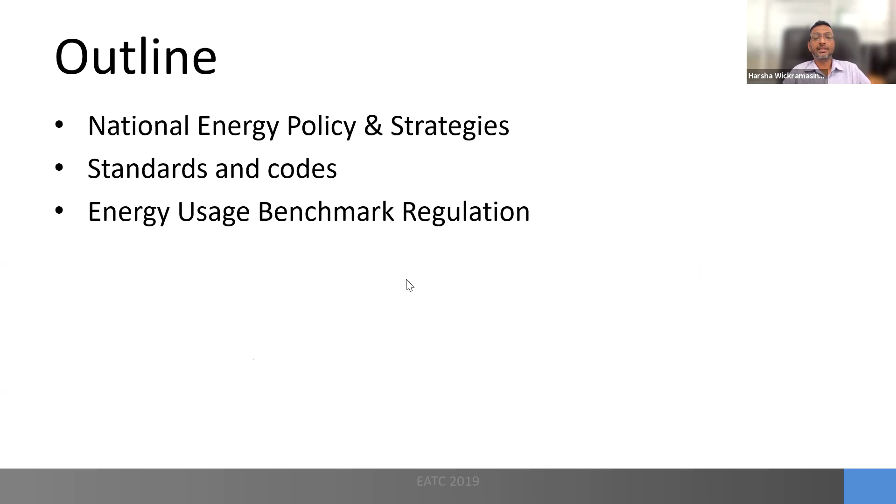So now back to the presentation. My presentation outline says national energy policy and strategies, and then the standards and codes, and the energy usage benchmark regulations. Let me take you to the learning outcomes. After following my presentation, you will get an introduction to the national energy policy and strategies of the country, especially with the view of, there are several elements in this national policy, but on the energy efficiency side, special emphasis.

Then an introduction to the different codes and standards used in ranking of buildings. Not very much relevant to the plantation community, I must say, but you might be interested in understanding these things. And ramifications of the energy usage benchmark regulation on energy reporting, auditing, and improvement of energy performance of the facilities you manage. So that is the most important part of my lecture today.

So before starting the presentation proper, why worry about anything? We can very happily do without worrying about anything, but we worry about many things. As you are well aware, we worry about our children, we worry about our country, and there are so many. And as managers, we have to worry about our businesses, the production facilities we manage. So why worry about things is a pertinent thing.

So we will just focus on energy. Why are we worried about energy? So firstly, if something is to be improved, we have to control it. So this is a very important slide I am presenting to you. If something is to be improved, we have to control it. Otherwise, we have no control over it.

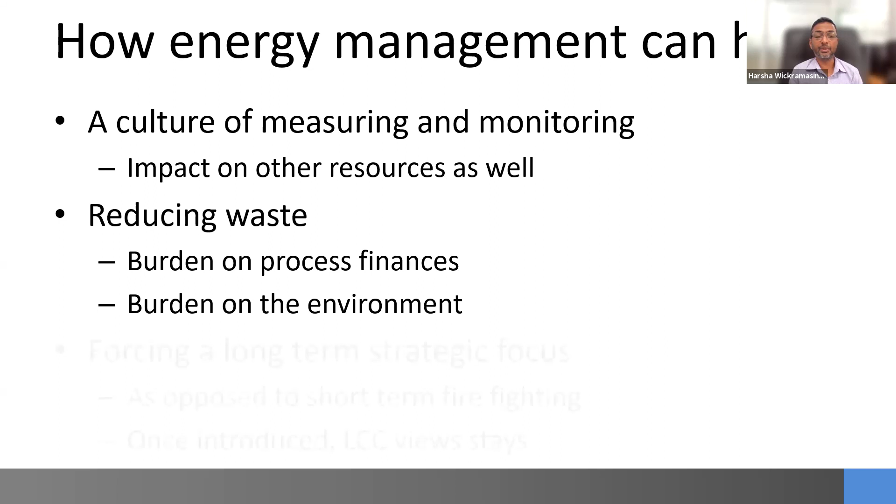And forcing a long-term strategic focus on your system rather than short-term firefighting is the way to go. Otherwise, people always resist that kind of abrupt change in your practices. So once introduced, the life cycle, LCC stands for life cycle cost.

So if you successfully implement energy management practices in the factory, definitely the life cycle cost thinking will come into your staff, and they will think twice before purchasing anything which will have greater significance in the time during the operations rather than during the purchase. So that's an added benefit of these things. So that being said, let us move on with the national energy policy.

Any problem or any question up to this point? I can conduct this in a very interactive manner. If you have anything, just unmute and speak. You can speak up. Okay, in the absence of any questions, we will move on.

So, contrary to popular belief, we have a policy for the national energy affairs. Unlike many other sectors, I'm quite sure the agricultural policy of this country is in the draft form for the last 20 years, if I'm not mistaken. It never materialized as a published national policy. Correct me if I'm wrong, but I just don't know whether we have a national policy on the plantations. I am quite sure we don't have a national health policy, or many other policies are missing in our country. That is why our country is in this sorry situation.

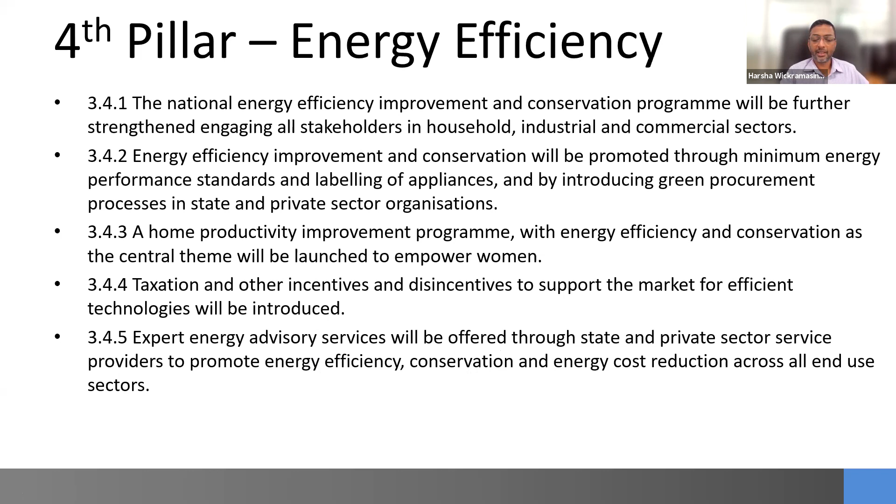We can get someone who will do that for a fee. We recommend you conduct an energy audit in your facilities at least every two years, because things tend to deteriorate when we move on. So these are the things, and there are some more.

Water resources will be recognized as a valuable indigenous energy resource, for power generation and agricultural water, so it will be treated as a valuable energy commodity. Conversion efficiency of power generation facilities is again not relevant to our discussion, but this applies to the CEB and private sector generators.

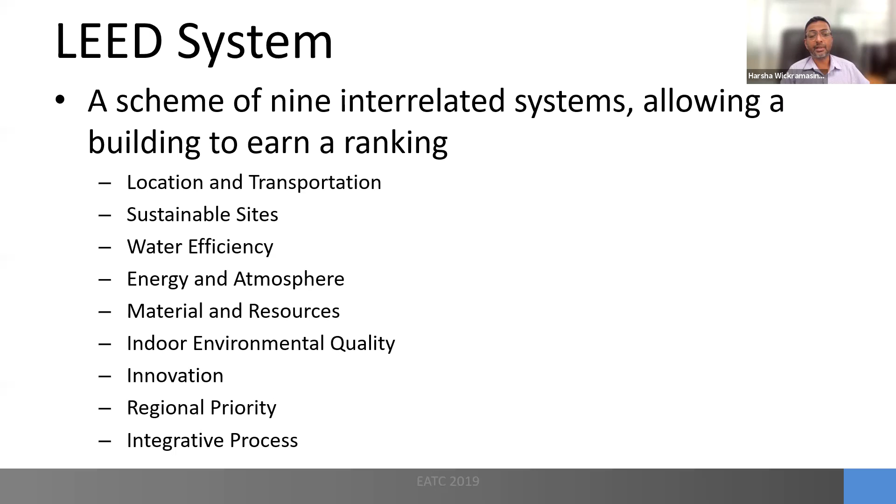There is a point scheme up to 99, if I'm not mistaken. Based on the point scheme, you get either a certified rating, silver, gold, or platinum - there are 4 levels. So if your building is really designed as a green facility, you might earn platinum status.

I know there is at least one apparel manufacturer in the country who has reached platinum status in one of their facilities in Seeduwa. There are also a large number of silver and gold rated buildings in the country. So this is a good system to keep the energy burden and the environmental burden low in your buildings.

There are many abbreviations used in this industry.

LEED stands for Leadership in Energy and Environmental Design, or something like that. There's LEED AP, LEED EB, NC, CS, CI, and so on. There are so many abbreviations associated with this LEED certification system.

But there are serious criticisms of this system by other quarters, saying that it allows people to score very easy points and become a green facility even without doing anything actually green about that building. Despite that criticism, people still use it because it's a very well structured and easy to achieve system.

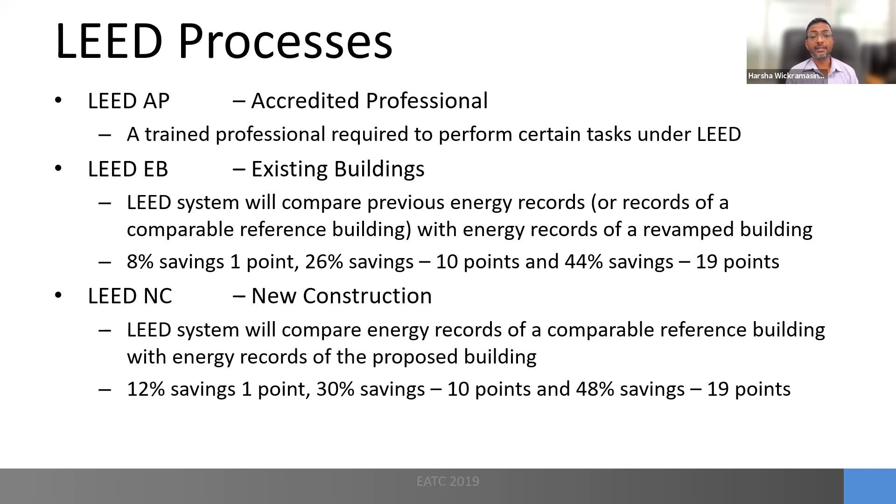CS and CI apply to common facilities like the World Trade Center building, where the core and shell is the outer envelope, and the air conditioning and large facilities of the building are operated by the building owner himself. CS refers to core and shell, that part of the building.

But if you have an office in the World Trade Center, that applies to the second part, LEED CI, or commercial interiors, where the changing of light bulbs, office equipment, and all that falls under the control of the tenant. So the core and shell is the landlord's responsibility, while commercial interiors is the tenant's responsibility.

So that's what's being said about the LEED certification system. I'm almost running out of time. So Green Mark is from BCA, the Building and Construction Authority of Singapore.

They introduced this in 2005. It's a code we rely on very much because it is substantially similar to Sri Lanka's environmental conditions. So we can bank on the BCA Green Mark system, which is based on 16 criteria, 52 indicators, and a 140-point system.

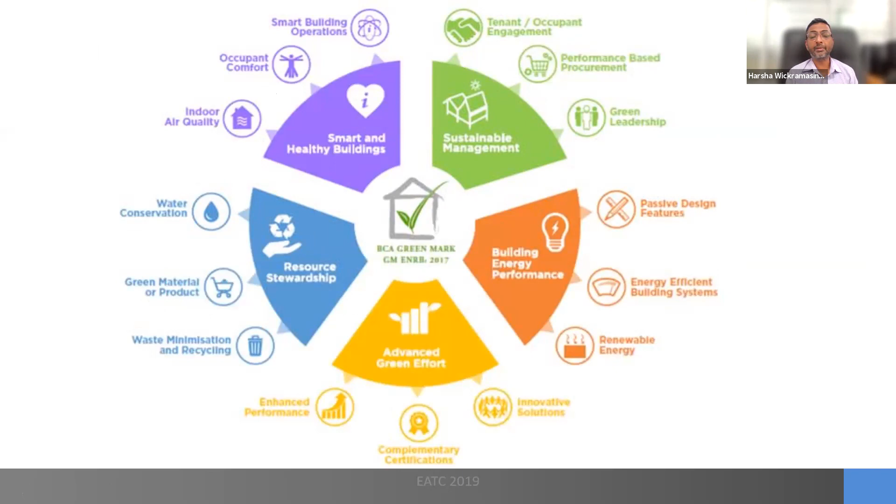And the beauty of the Singaporean system is that they make it more stringent by the year. Every year there is a revision, so it becomes more and more stringent. So people will have to take a lot of measures to make their building stock energy efficient.

Then we have ASHRAE 90.1, from the American Society of Heating, Refrigerating and Air-Conditioning Engineers in the United States. It has a separate volume called 90.1. It's not very relevant to you, as it's for commercial, air conditioned buildings, so I will just explain it briefly.

This is a very technically sound and well-implemented code compared to the LEED system and the Green Mark of Singapore. It is very sturdy, useful, and result-driven. So we tend to base our building code very much on ASHRAE 90.1 as a result.

It covers the building envelope, the outer shell of the building, the air conditioning and ventilation system, the lighting system, service water heating, and other equipment in the building. These things are covered in 90.1, and our building code is also structured very much along these lines. I'll skip some of this since it's somewhat similar to the green building system.

So the intended design and the comparable building are compared, and the design energy cost must always be lower than the energy cost budget of the particular building. So they are driven to pluck the low hanging fruits first, I mean the easier things first, and progress to the difficult things. That is how these things are done in the case of the ASHRAE building code.

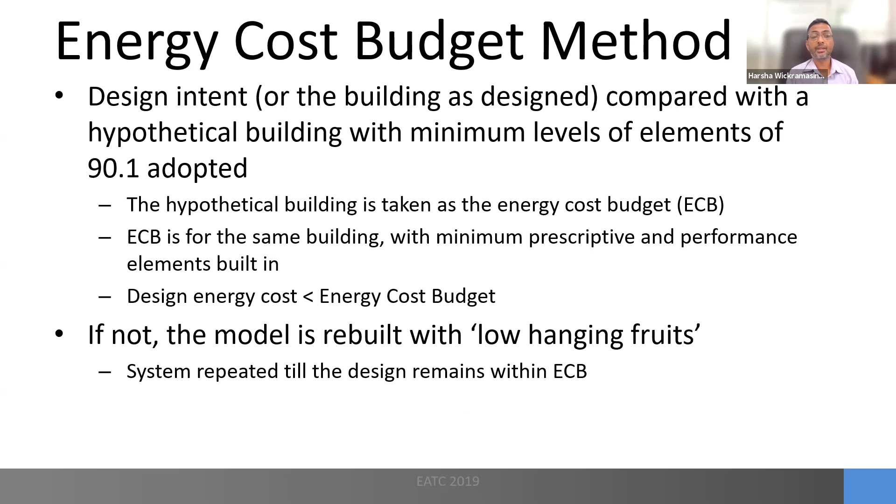They have introduced a building energy system on a voluntary basis since 1991, but very unfortunately, it's a difficult code to follow. As a result, people are following the private sector initiative more than the government sector initiative in America. But it's nevertheless a good code.

Then this is important for the industry and the rubber industry, because ISO 14001 and 9001, most of you are very much aware how these systems work. And we are glad to say there is already a system for energy management, ISO 50001. It was launched in 2011 and underwent a major revision in 2018.

So there are no benchmarks, but just like the quality management system, it's built on your own processes and own targets. So it's a continuous improvement system based on the PDCA cycle. I'm sure you understand the PDCA cycle, the Japanese way of management. So development of policies, setting targets and objectives, making data-backed decisions, measuring results, reviewing effectiveness and continuation of the improvement cycle. So this is how the ISO 50001 system works.

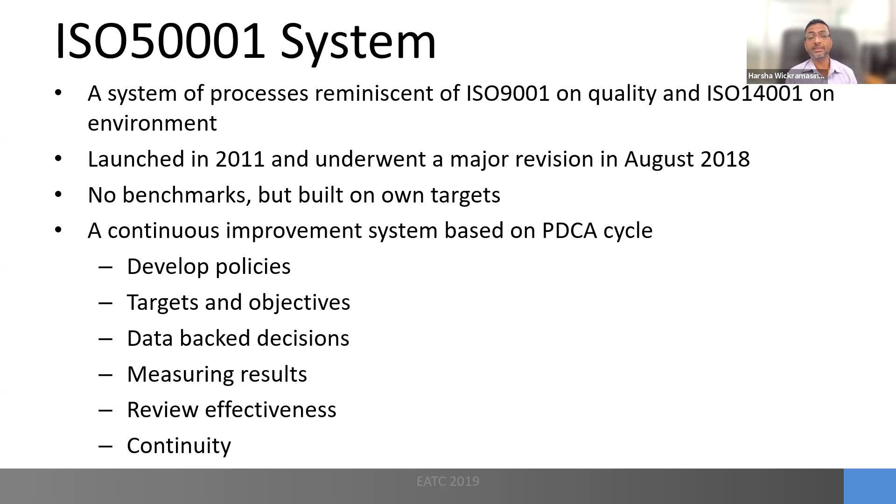And fortunately, our Sri Lanka Standards Institution is an accredited body who will help you in implementing ISO 50001. If you are really keen, contact us. We can get you help to do these things in your factory. And it's based on a family of documents in this fashion: energy audits, energy management systems, guidance, like that. So if you are conversant with 9001 and 14001, this is the ideal solution, a complete solution for you to consider. Any questions up to this point?

Okay. In the absence of any questions, we will move on. The difficult part, but I have very limited time, so let me try to conclude it as fast as I can. The energy benchmark regulation is not readily applicable to your organization yet, but the second batch of agencies will definitely cover the plantations. So be careful, try to fully understand what this is about.

So some of you may be very much aware of the legal system of our country, but for the people who are not, let me take you through quickly. At the apex level, we have the constitution of our country, then the acts of parliament. The Sri Lanka Sustainable Energy Authority Act number 35 of 2007 is one such act. And the act establishing the National Institute of Plantation Management in 1979 is also at the same level.

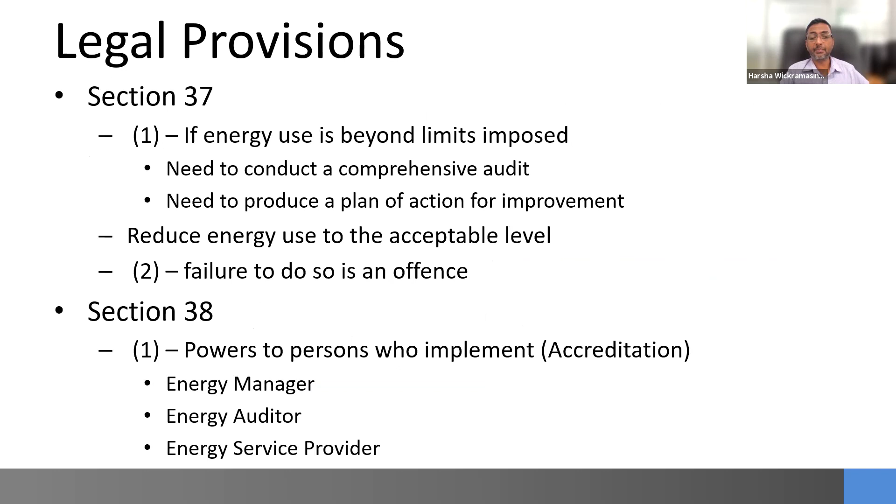So let me quickly show you the provisions. Sections 35 and 36 are the ones we used to develop the new regulation. And with 37 and 38, the people who are engaged in this activity can be empowered with the simple regulation. That is what we have done. And also covering 39 and 42 about energy information: what kind of information we can expect from an end user facility, and what will happen to the end user if they contravene this law. These are things which we have framed effectively.

So to cover all the legal powers, we have used the Sustainable Energy Authority Act number 35 of 2007 as the foundation. Then the benchmark regulation, which I intend to explain here, as the main framework, and schedules 1, 2, and 3 to demarcate who shall comply, accreditation for who is empowered to do certain things, and rules on forced implementation. All these things in combination have given us this system, and the whole system is based on the ISIC information management system.

ISIC stands for International Standard Industrial Classification. There is a 4-digit system where all the manufacturing operations, service operations, and business operations of any economy can be classified. So we have used this numbering system from the United Nations to classify industries. And when all these things happen together, we'll have a mandatory energy efficiency improvement and conservation program for the country.

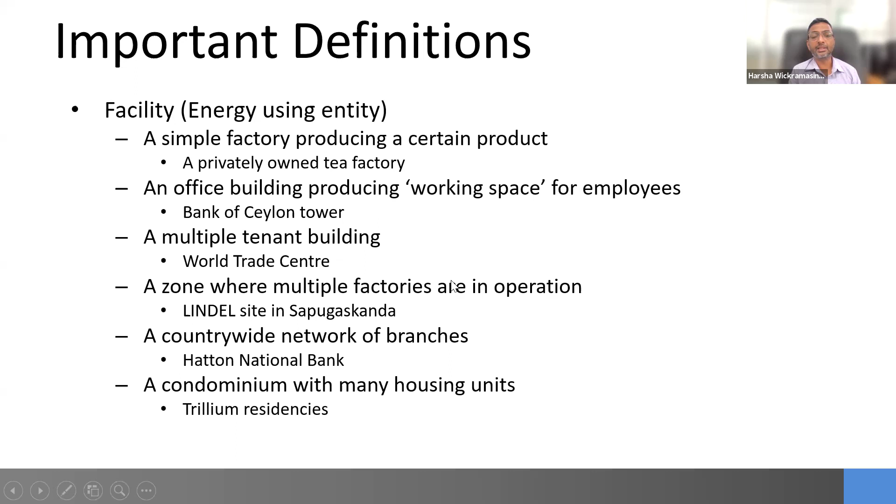And also condominiums. Individual homes like yours and mine, the planters' bungalows will never come into this picture, but places like Trillium Residencies where a large number of housing units are grouped together in a condominium, they will come under this regulation very soon. So we have structured it like that.

So you don't have to worry too much whether you are going to jail or you are going to pay the fine. If it's a factory producing a certain product, it will be the board of directors owning that facility. But if you are the sole proprietor, definitely it's you.

So you have to be careful because the litigation and the consequences, everything rests on the board of directors, not the factory officer, not the mechanic, not the superintendent, not the Sinnadure, but the board of directors of that regional plantation company will be at fault. So we will be suing them. So the effect will be very severe on the culprit plantation managers. So beware.

So there are certain things I have to explain here. So there is a particular person known as the facility manager, in which case it becomes the superintendent of your organization. In the case of the energy manager, it will most likely be the group engineer taking care of your energy expenditure of the tea factories coming under your purview.

If it's a single factory, then probably you have to have at least an external energy manager to take care of your facility, like the fourth bullet here, a hired person or a firm for smaller facilities where no internal capacity is available. So if it's a very large facility and if the group engineering manager is fully occupied, then they can hire a firm to take care of the energy aspect of the facility. So this person or the entity will be responsible for energy data recording, reporting, and coordination with the authority. So you have to have an energy manager for your facility.

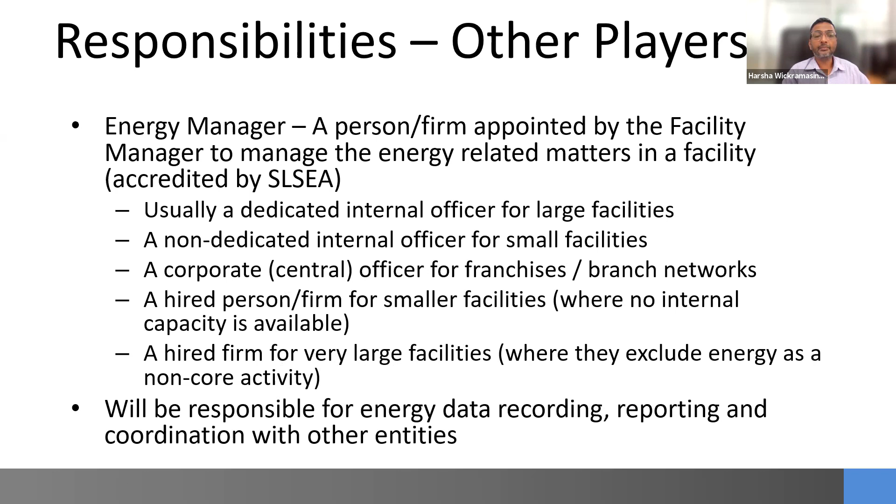Then there will be an energy auditor and an energy service provider. If your facility is found to be performing lower than the energy benchmark, you will be required to conduct an energy audit immediately, and the energy auditor will have to give you a list of improvements possible for you to qualify. If it is energy efficiency improvement, the company will be known as the energy service company. If it is a company integrating solar into your rooftop, something like that, then it will be known as a RESCO, Renewable Energy Service Company. So you will have to get the services of such a company. There are about 30 accredited energy auditors in our country. You can get the services of any one of them.

So for the implementation of this regulation, our authority, Sustainable Energy Authority, will identify a category or several categories of facilities and schedule those. So we can categorize office buildings used only during daytime, and we can also have several categories, all commercial buildings like that. Once a facility or a range of facilities are scheduled, then compliance is expected from these people. So there will be the first report, the reported energy use. It will be the commissioning report of the new building or derived from existing facilities, actual energy use for a particular period of time. We have taken the period to be 1 year. So starting from 2021, there will be the first data collection cycle where we will get the reported energy use from all the scheduled facilities at the tail end of year 2022. That is next year.

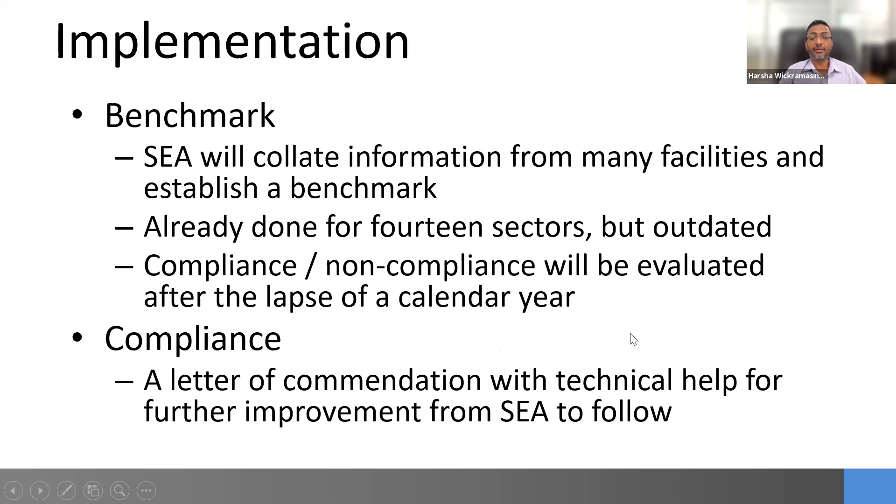Thereafter, for non-compliance, they will be required to perform an energy audit and provide a new report known as the prevalent energy use report. It will also have the plan of action for improvement and implementation program, which year you are going to implement the roof fan modification, which year you are going to improve the tea rollers, like that. There will be an energy efficiency improvement and conservation plan developed by you with the help of the accredited energy auditor. And after implementing this plan, you will most likely enter the whitelist or the compliance stream.

So if you are still unable to comply with this requirement, non-submission of information, that is one offense. Failure to conduct the energy audit when requested, and failure to reduce energy use to the benchmark level. All these things will be taken as offenses, and there will be severe consequences. So just remember that. And there are 3 schedules.

I will not take much of your time. These regulations are one thing. Schedules attached to them are a different thing, because these are easier to change rather than changing the regulation. So for the moment, we have scheduled buildings which are more than 5,000 square meters in size, and of a particular economic category. I will show you how.

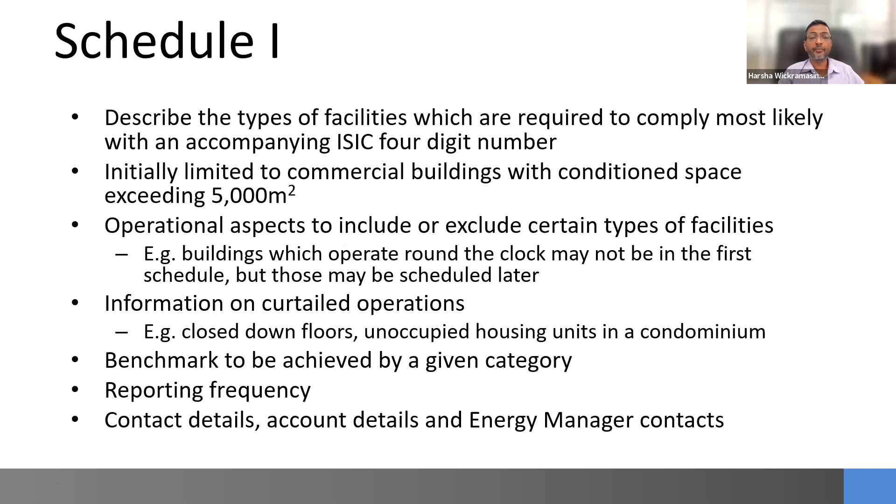Then the Schedule 2 is the data submission formats, what to be filled. It is available in our website, so all the building owners can submit this energy data. And the Schedule 3 is a simple rating table, which will guide you to see what kind of star performance you have achieved, or whether you have entered the non-compliance rating level, whether you are below the benchmark or above. If above, how better you have performed against the others, it will be given in the Schedule 3.

So with these schedules and the regulation, we are going to regulate. The good news is that coconut and rubber, they are not in the first item. For the first item, we have selected retail sale in non-specialized stores with food, beverage, and tobacco predominating, meaning places like Cargills, Keells, Arpico, the supermarket store we call. These are regulated in the first regulation, which will be effective from early next year. And the next item we have selected is the other retail sale of non-specialized stores. So there are 2 categories, but predominantly places like Keells and Cargills.

Then we have selected the second class, that is the banking or the financial services industry, covering from the central banking industry, the central bank of our country, there's only one. Then other monetary intermediation, all the banks, leasing companies, except insurance companies and pension funds. So all the insurance companies and the EPF, ETF, those places are spared, but every other player in the financing community, they are taken care of under these things.

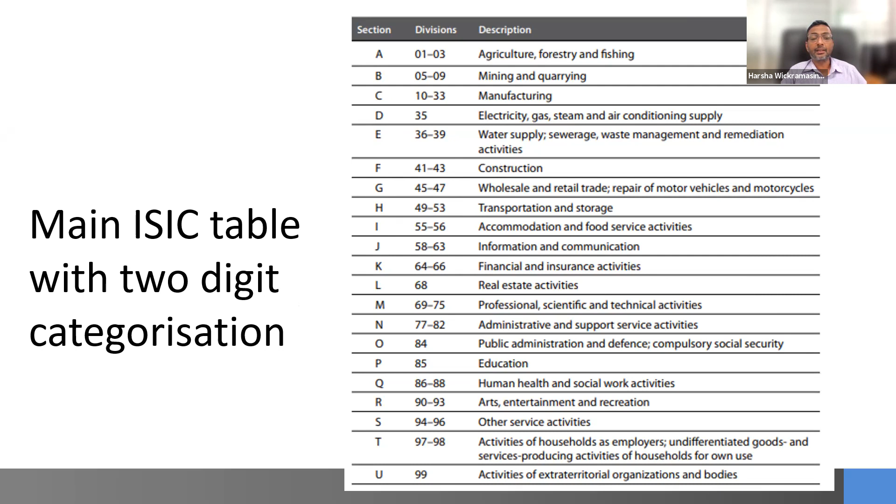So there you can identify your category here. I think the industry falls under food and beverages. I just don't remember the item. There's some number here. So your category and your 4-digit number can be selected from that one, and it will be regulated. So this is the way things are. The food industry division 10. So your thing is coming under most probably 10 and some other number. We will see that later.

So the compliance, the commercial energy inputs can be easily accounted for. So electricity, diesel, fuel oil, all that can be taken in. But if you are using your own fuel wood and own biogas generation at site and own solar generation from your rooftop, then there can be issues in data inputs. But the amount of output, it's very easy in the case of plantation processing, because kilogram of black tea is going to be your primary output, or desiccated coconut or the rubber kilograms.

So it is very much easier for plantation community, but it's a nightmare for the banking community or the supermarket community to think about their output, what will be the output. So we are thinking hard these days how to capture it. And capturing all variables in the energy demand equation is essential. And data submissions must be able to complete their report generation as given in Schedule 2.

So the offenses I mentioned to you, the failure to submit the energy use report, and failure to conduct the energy audit, and failure to reduce the specific energy use to below the benchmark. So all these things are offenses, and the consequences, we have the fine stated, that is 100,000 rupees and 2 years imprisonment or both. So after conviction, if you are still operating your factory in an energy wasteful manner, you will be fined 100,000 per day. So this is the punitive element.

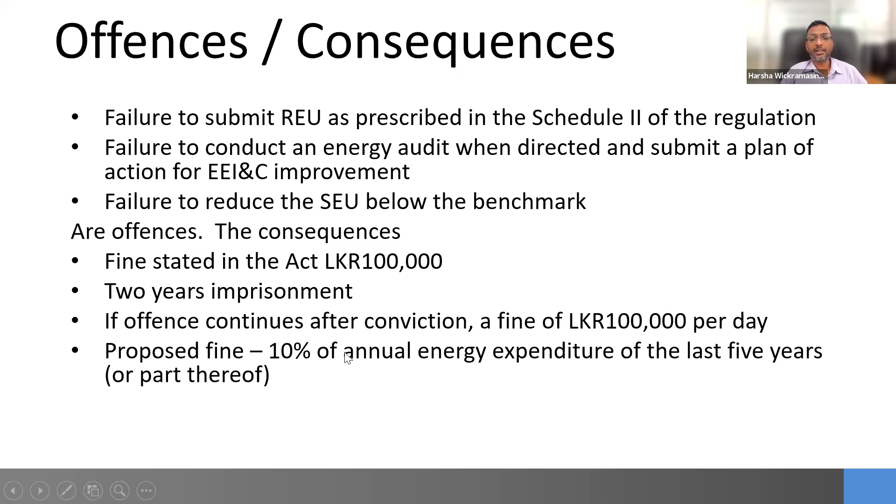So paying 100,000 rupees every day from a factory is not going to work. So the end result is you have to improve your facility or face all these unnecessary trouble. But we have proposed a 10% annual energy expenditure in place of this imprisonment and 100,000 a day fine. So this is somewhat summarizable. So we will see whether we get approval from the legal authorities whether this is possible. And it will change the reporting culture of many places. But fortunately, the plantation community, as I have explained, they are very much better in reporting and record keeping.

So the voluntary reporting is what is happening now. Energy managers are appointed. They are mostly the group engineer himself, and the duty is often neglected because he has so much other work. These things are not done. Energy managers leave facilities and migrate to greener pastures, leading to collapse of the system. And reporting frequencies also vary.

But in the new system we are proposing, the reporting will be mandatory. You will be fined for not reporting. It's a firmed up duty; an internal dedicated person or an external energy manager will have to be appointed and made responsible. And you cannot neglect it like you do now, so there will be a very serious consequence. The energy manager function shall continue even after the person resigns, so there will have to be assurance of the continuity of this system.

The reporting cycle is fixed, quarterly reporting, and this will be enabled by an ICT platform. You don't have to fill in a lot of forms. It is purely logging onto an internet portal and providing this data. So this is my penultimate slide, I suppose.

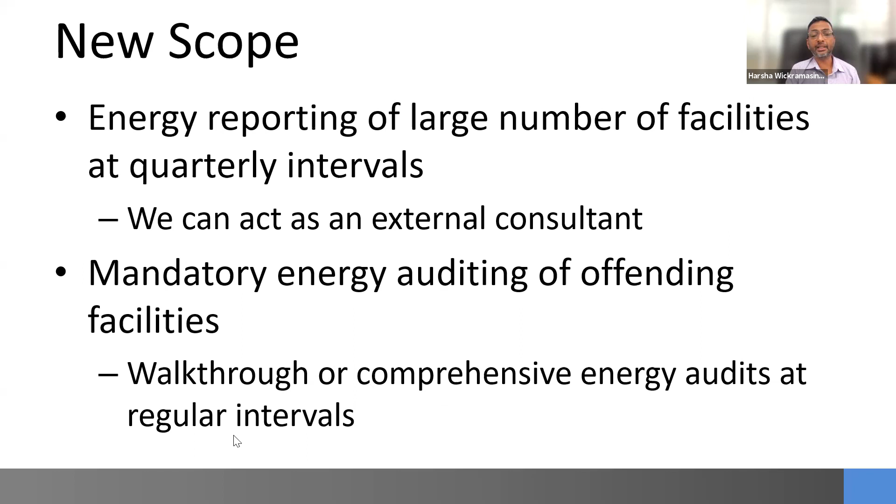I don't know about time management, since I have time to answer any questions. Over to Mr. Vidra Bandara. We can have a brief discussion or a question and answer session if that is possible. Any questions? Looks like not, Engineer Harsha Wickramasinghe.

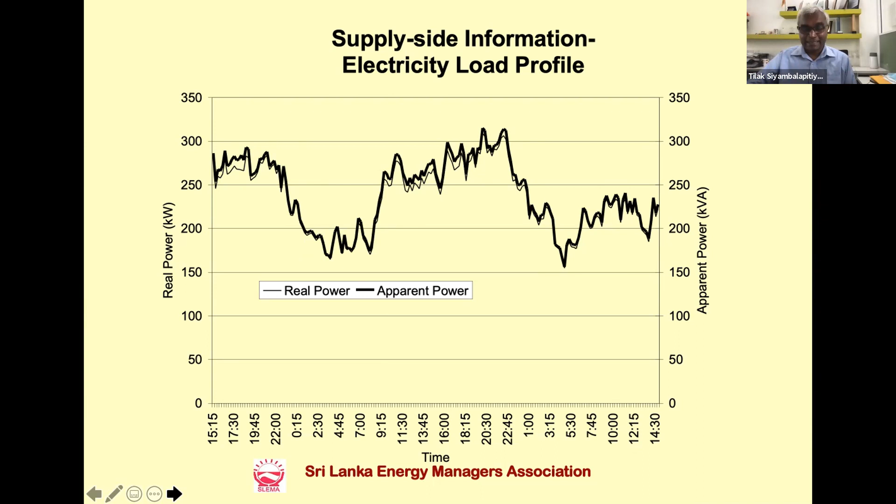I will later show you a tea factory load profile, but this one is for a commercial building. Different buildings have different profiles. This is just to tell you that profiles are different across different sectors.

So what is the main system and what are the subsystems, and what is the heaviest electricity consumer in your factory? I will skip this for the moment.

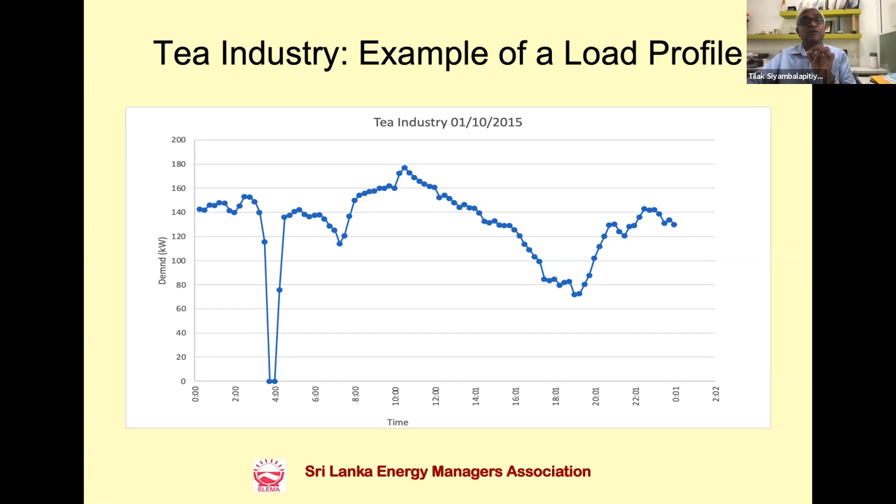So if we use more electricity in the peak time, as you know very well, you can look at the electricity bill. Electricity will be more than 20 rupees a kilowatt hour. Daytime electricity is about 11 rupees for most of you. And off-peak time, for most of you, it is about 6 rupees.

So whether the electricity tariff carries a subsidy or not is relevant, but it's a different issue. And for your information, I can tell you that industrial electricity prices are subsidized by the government. But then even within the subsidy, there is a time of use pricing.

So therefore, unless you know what is happening, you cannot save. As the saying goes, if you don't measure, you don't know. If you do not know, you cannot save. It could be a financial saving. It could be an energy saving.

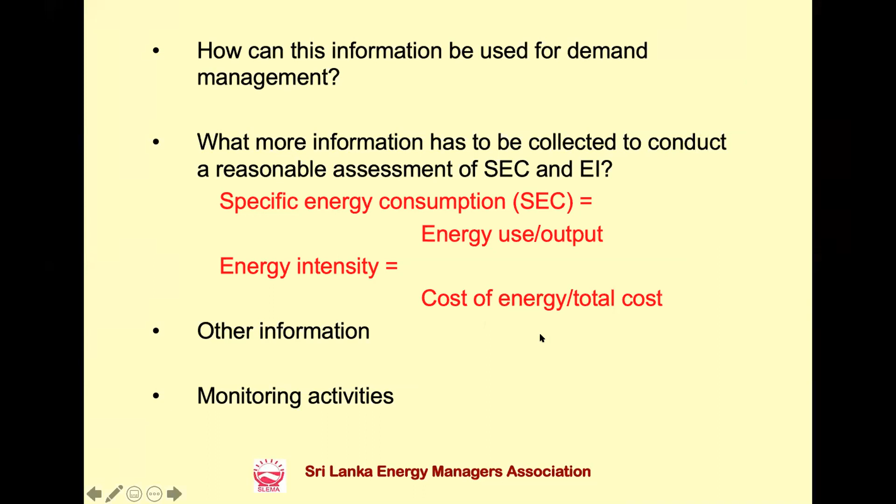Of course, the cost of energy goes up and down if it is biomass. Cost of electricity, of course, I have to admit usually only goes up, not down, because electricity is largely determined by imported capital equipment or fuels. So if at all, electricity prices generally go up; occasionally when various incentives are introduced, electricity prices go down.

So monitoring this is again relevant because then you know what weightage you should give to managing your energy. We generally tell the industry that if your cost of energy is more than 10% of your total cost, total recurrent cost—so don't include any depreciation, but total recurrent cost—that means energy cost, manpower cost, maintenance costs, and any interest payments.

So these are the recurrent costs in an industry, not the capital cost, not the depreciation. So energy cost, if it is more than 10% of the total operating cost, we say it is an energy intensive process. So for your tea factory, your rubber factory, or other plantation manufacturing facility, coconut industry, or industries to which you advise, please examine what the energy intensity is.

There is much other information that you can collect and keep, but these are the basic information at a macro level of your facility. We will come to more details; I will introduce you to some more details. Now, what do we do with this information?

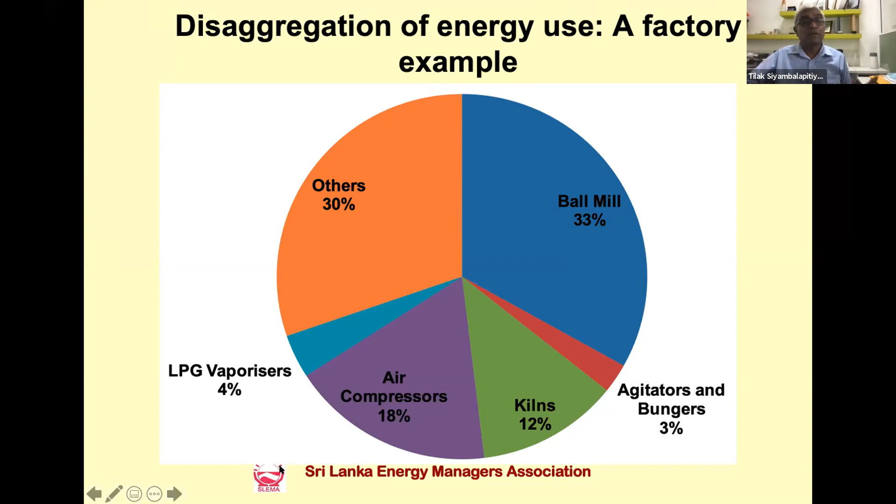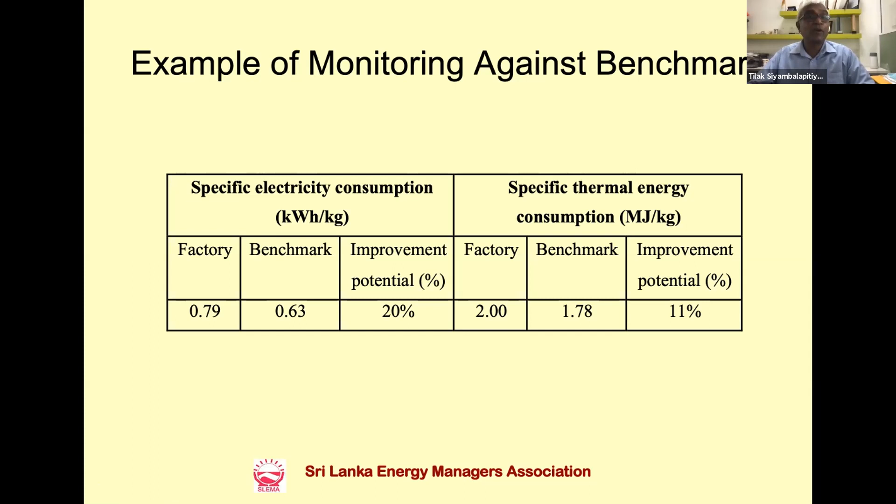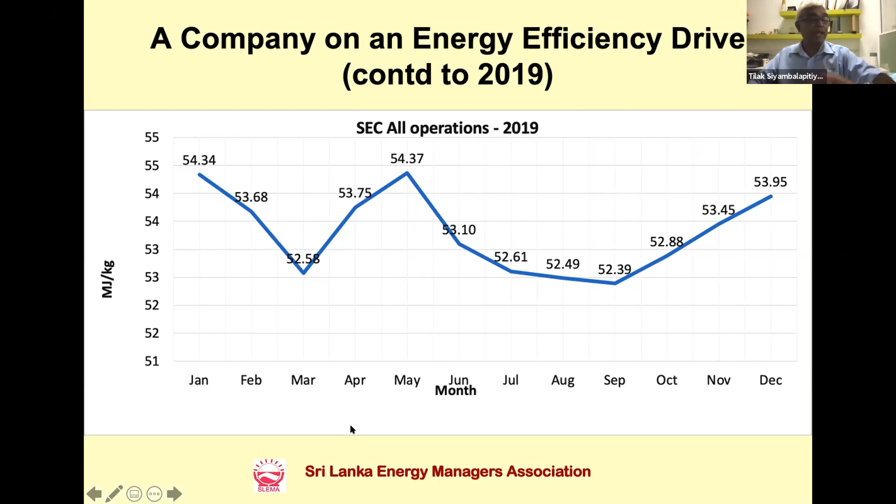And then before I close, because I have been asked to economize on my time, I will show you some recent studies we did in the tea industry, as follows. The tea industry for the last 20 years has been requested to manage the airflow to the withering process. All of you know that. So I, being one of the people who were associated with the initial studies, recently we thought that we should do a baseline study as to how the industry is performing with regard to airflow management to the withering process.

So I don't need to explain to you about the withering process. You know much better than we do. So withering is a heavy electricity consumer. So therefore, the energy use in withering has to be managed such that, as the tea industry experts have taught us, if withering is managed well, the product quality also improves, as well as the electricity consumption also reduces. So we went to a particular factory. I will show you a different set of information. Let me close this share and share a different file.

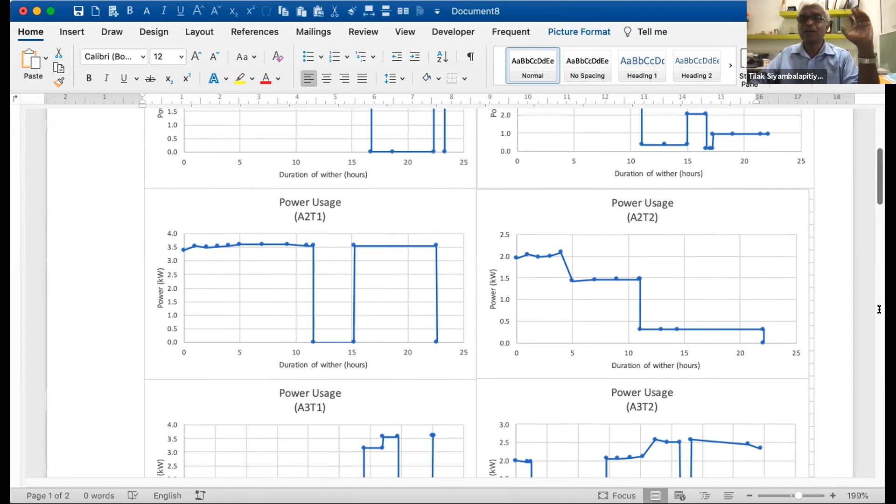So this was our most recent findings in our studies, and these studies were done in the month of March. Not so long ago, in the middle of two lockdowns, we quickly ran to these factories and did these studies. So what I take out of this is that good work on energy efficiency improvement has been implemented. Certain investments have been made, but now is the time to further optimize and save more.

And energy saving in this case, as the experts tell us, saves energy and improves quality. So there are some more specific interventions to be done. I'm sure in the CTC machine, in rolling, there are similar opportunities to improve energy efficiency. In the final manufacturing process also, there will be opportunities to improve. So we only looked at basically one of the three main electricity consuming systems in a tea factory.

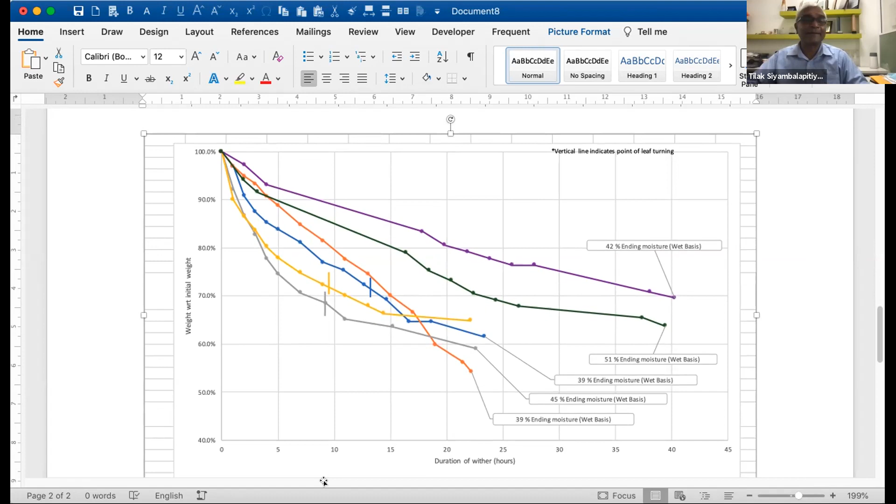So I would stop there, leaving a few minutes at least for questions. I did not take my full one hour; I think I took only about 40 minutes. So your questions are most welcome. If you want to discuss anything specific, I can put the slides back on the screen.

Maybe I can ask a question: for those of you who are from the tea industry, I'm sure most of your factories are equipped with airflow control, popularly known as variable speed drives. Is there any monitoring work going on as to how the operators are using them? Can somebody just share some experience that you have?

Fine. Any other questions? Have any one of you been able to look at the load profile of a factory or your factories? Has anybody asked CEB, can you give me my load profile? Because as you know very well, your electricity meters are read remotely by CEB. Occasionally, when the signals are not good, maybe they will visit and read. But usually, the standard practice is for remote reading of your meters.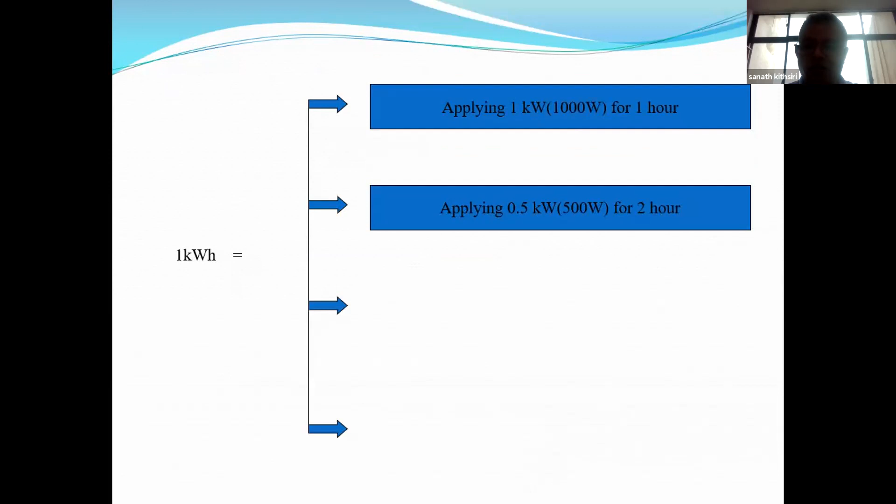Say we have 500 watt equipment. We use it for 2 hours. Again, it consumes 1 kilowatt hour. Say we have 100 watt equipment, that is 0.1 kilowatt. If we use it for 10 hours, it also consumes 1 kilowatt hour. Say we have 2 kilowatt equipment, we use it for half an hour. Again, it also consumes 1 kilowatt hour.

If you look at this example clearly, we can see the energy consumption does not only depend on the size, but also on the time. That is a very important thing when we consider energy consumption and when we look for energy conservation measures. That's why, before I start my presentation, I give that example. Right, I'll show you another graph. I don't know whether you are familiar with this.

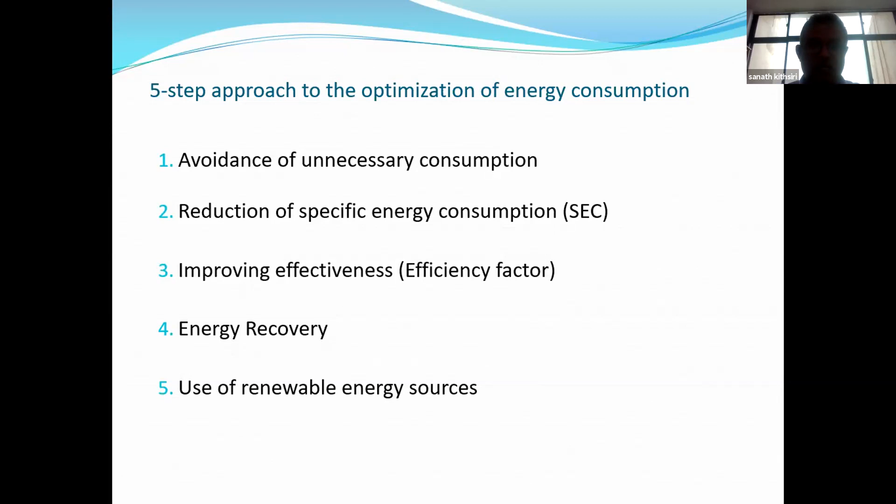Those are the 5 strategies, right? Yeah, these are the ones I discussed previously.

Avoidance of unnecessary consumption - for that we can use timers, since they're not that expensive. For example, to reduce energy wastage in washrooms we can use timers. In corridors too, because people are not interested in switching off idling lights. Instead of relying on humans, we can assign this task to timers, thereby reducing unnecessary consumption.

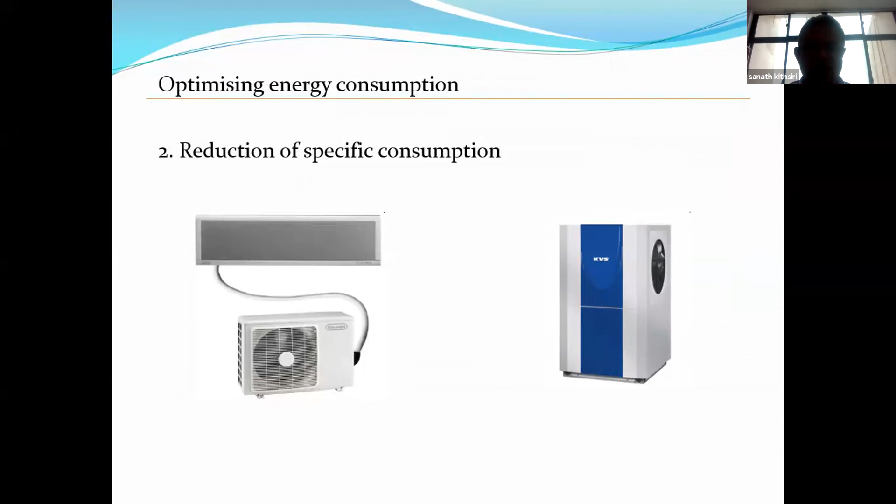Specific energy consumption reduction, as I mentioned earlier, instead of old units we can use highly efficient equipment to reduce energy consumption. Efficiency factor - energy wastage through exhaust can be used to generate energy, improving efficiency. And recovery I have already discussed.

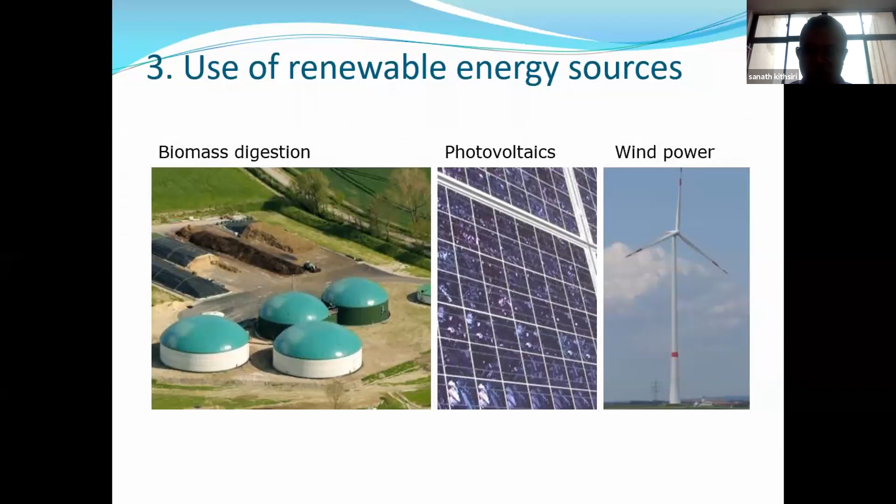Renewable energy has many options. Biomass is one - industry has successfully used biomass, because earlier many furnaces ran on fuel oil, but nowadays most factories have switched to biomass from furnace oil. Photovoltaics, meaning solar power generation, is another option. And wind power, in certain areas, can be used to meet energy demand.

When it comes to energy applications in office spaces, these include lighting, ventilation, air conditioning, operating appliances, pumping water, and sometimes heating water. We use electricity, gas, and biomass for these applications.

In the plantation sector, you may have managers' bungalows and head office complexes. Thorough knowledge of energy conservation opportunities in those areas is very important. Air conditioning is very important - if you look at the energy balance of office spaces, air conditioning consumes the major part of energy. It's the biggest energy consumer, so maintaining the air conditioning system appropriately is very important. We'll see the energy conservation opportunities, especially in air conditioning.

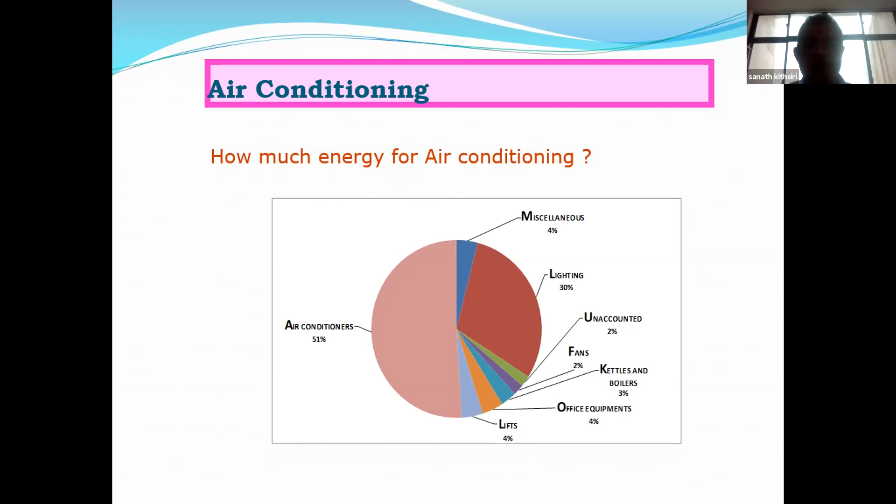If you look at the energy balance of most places like office buildings, banks, and hotels, air conditioning is the biggest energy consumer. That's why maintaining the air conditioning system properly is very important if we try to reduce energy consumption. The important thing is, if you increase or decrease the air conditioner temperature by 1 degree, your energy demand will increase or decrease by 4%.

That's why it is recommended to maintain the space temperature at the appropriate level. For example, for countries like us, it is recommended to maintain space temperature at 26 degrees. But we have seen in most places people are maintaining space temperature at 22, 20, and rather low temperatures. But to get proper thermal comfort, you have to maintain temperature at 26. Thereby, you can achieve both thermal comfort as well as energy efficiency, right?

Other conservation opportunities - we have seen a lot of places where air conditioning space should be constructed closely, because if there is a gap, there is air exchange, thereby the energy consumption will increase. So avoidance of infiltration and exfiltration is very important, because we have seen most places people don't pay attention to door closers. It is recommended to install door closers, and if there are door closers, check their function frequently, whether the door is closed properly or not.

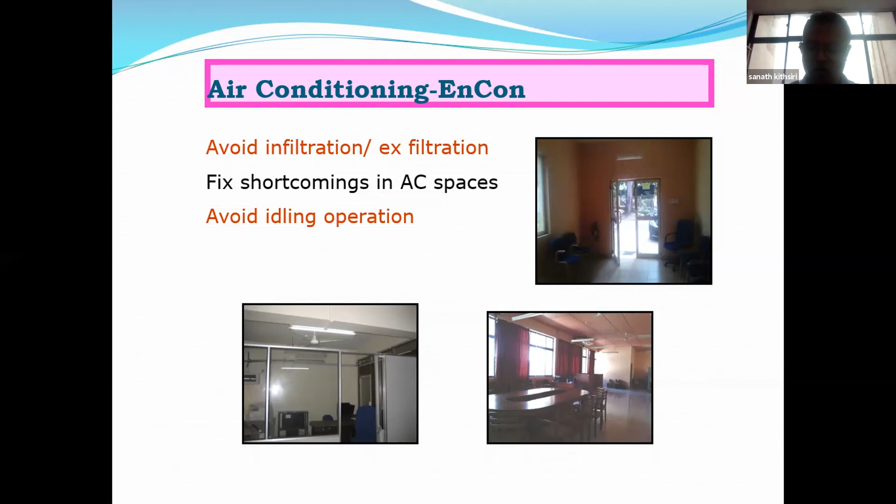Sometimes we have seen there are no doors to separate the AC space and non-AC spaces, because you select a small AC depending on the size of the space to meet the air conditioning requirement. But if there is no door between the non-AC and AC space, your space ultimately will increase, so the small air conditioner tries to meet the requirement in both places and runs continuously. Because of that, the lifetime of the air conditioner will be shorter. Those are the main shortcomings we basically observe in most office spaces, so you have to avoid those shortcomings.

Another thing is, if we can reduce the heat gain through the windows and doors, definitely we can reduce the energy consumption for the air conditioner. For that we can use infrared radiation films, heat reflective films and curtains. Sometimes you can grow trees, apply shadings - there are a lot of methods to reduce the external heat gain.

Other thing is, proper maintenance is very important. It is advised to clean the air filters periodically, because we have seen once people install the air conditioner, they never clean the air filter, and because of that the air conditioner will damage very quickly. Another one is replacement of old and inefficient air conditioners, because nowadays we have a lot of energy efficient equipment. If you have an air conditioner that is 10 or 12 years old, there is definitely a possibility of reducing energy by replacing that old inefficient air conditioner with an efficient appliance.

Other one is, we have seen some places with a lot of individual air conditioners. If you look at this table, I have mentioned the type of ACs - for split air conditioners, the COP, which is the way of expressing efficiency, is 2.2 to 3.2. But if you consider larger electric chillers, the COP value is twice that of split units. So if you have a number of split units, rather than operating those systems, if you can have one large chiller, definitely you can reduce the energy consumption.

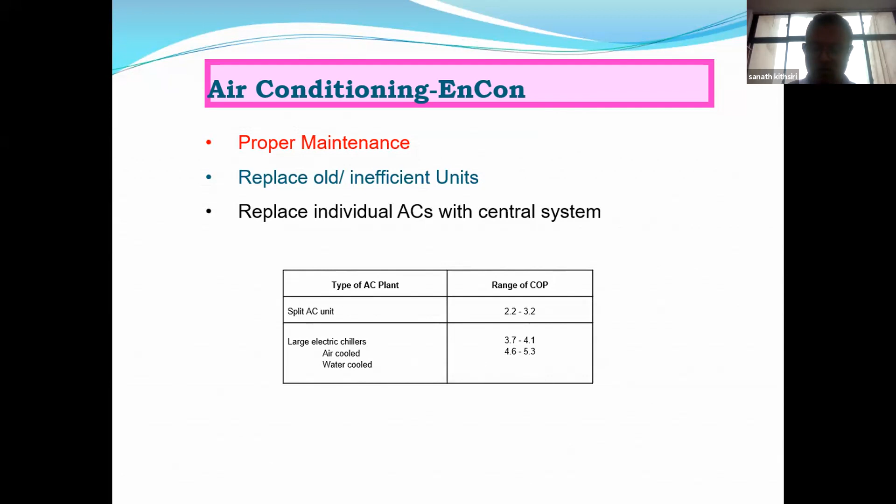Those are the main conservation opportunities. When it comes to lighting, since most office spaces and factory buildings use lighting to illuminate, in the tea industry the overall energy consumption for lighting is in the range of 10 to 15%.

When it comes to lighting, there are two definitions. Lumen is the total amount of visible light emitted by a source, right? That's what we want. But visible light in different directions is not important.

Because of that, we have defined another term: lighting lux, that is lumen per square meter. If you have a table, the lumen per square meter of that table is called lux. That is the important parameter.

If we refer to activities, for example corridors, we say the required lux level is 50. Reading room, reading table, we say required lux level is 300. Likewise, to specify the required light level, normally we use lux.

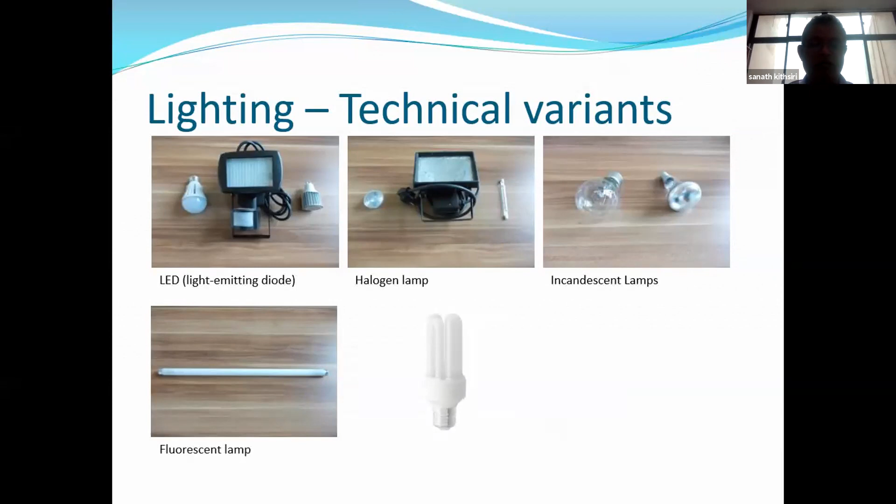Different types of lights - you can see LED light, tube lights, halogen light. There are a lot of lighting options available in the industry today. I'm not going to discuss all of them.

Lumen, as I mentioned earlier, is the visible light. If we can increase this value, that is very important, because that's why nowadays LED plays a major role - in an LED bulb the efficacy value is in the range of 160 to 200, meaning if we provide 1 watt, it will give nearly 180 lumen output. But in the case of incandescent lamp, if we provide 1 watt, it gives only 12 lumen output.

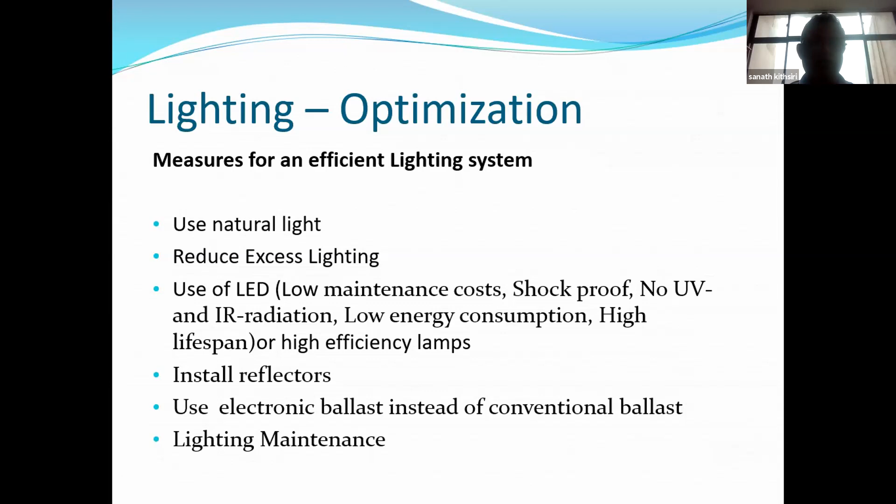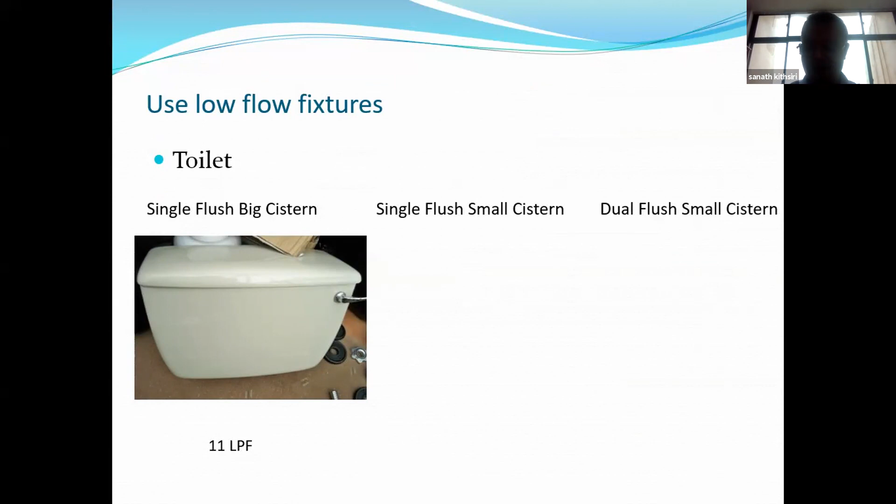Now I will talk about another important aspect, water. Water is also a very important aspect we have to consider, especially in office buildings. Earlier people used large flushing systems, and later designers changed the design to smaller systems to reduce water usage. Then they found that flushing is used for solid waste and liquid waste, and for liquid waste we don't need much water. Because of that, designers designed dual flush systems. You can see there are two buttons. For liquid, once you press the smaller button, it uses 3 liters of water. If you press the other button, it uses 6 liters.

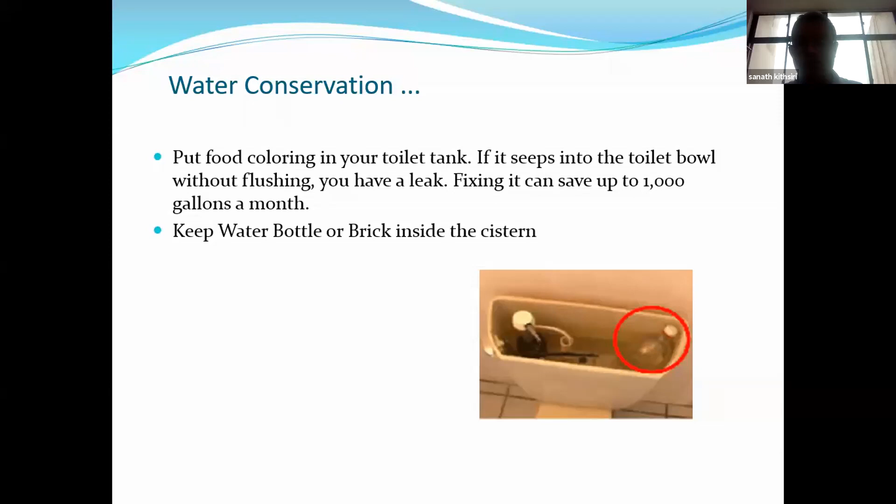Thereby, if you have a large system and replace it with a dual flush small system, you can reduce the water consumption considerably, right? Another one is that with time there may be leakage in the system. Say you have an older system. I will show you the cheapest option to convert the older one to a water efficient one. Take a mega bottle, fill it with water, close the cap, and put the water bottle in the system. That reduces the water consumption rather than buying a new one. That is a low cost option, right?

Okay. Can you hear me, Pandara? Hello.

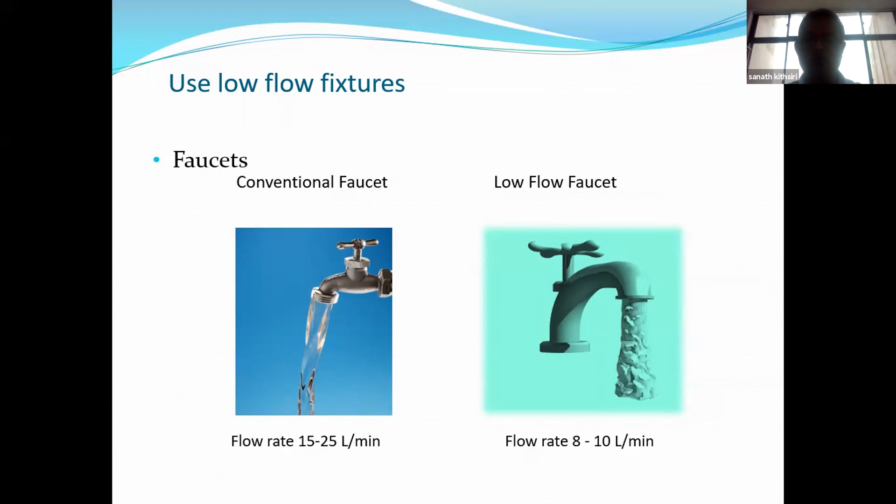Right. When it comes to taps, rather than standard taps, nowadays there are water efficient taps. If you switch from conventional taps to water efficient taps, you can reduce a certain amount of water, right? Also showers. When comparing conventional showers with water efficient showers, you can see a considerable amount of water can be reduced, right?

Right. So now we move to the process machineries. In the tea industry, basically we have a withering process, then rolling, drying, packing and sorting. Those are the main activities. For services, we have blowers, motors and rollers. For lighting, we use lights. We have furnaces or boilers, in which we generate hot air, and we have a dryer to dry the tea, and we use water pumps. Those are the main energy applications, right?

So when we come to the energy conservation opportunities in processing, if you look at the electricity bill, it's not similar to the one we receive in our domestic bill, because in a domestic bill there is only one charge for the kilowatt hours, but in industry we have another charge for the kVA, right? So we have a demand charge as well as a unit charge. And for the demand charge, the CEB will monitor the demand and calculate the average in 15-minute intervals.

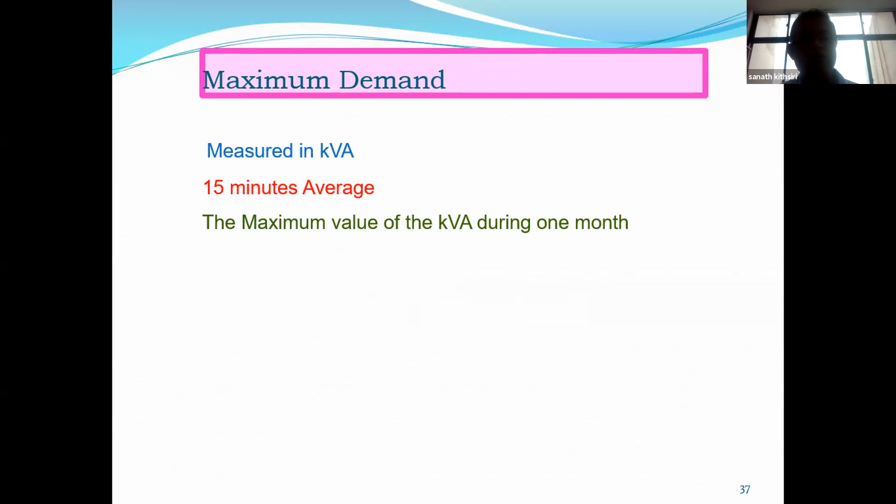Because normally, if you look at the tariff, the demand charge for 1 kVA is 1,100 rupees, right? So maintaining the demand is very important. Because of that, people sometimes use power factor correction banks in their premises. But in most of the places we have seen there are no capacitor banks or power factor correction banks in their premises.

So what you can do is first log your demand using the energy logger. Thereby you can see if there is any possibility to improve the power factor and thereby reduce the demand cost. But if you look at the electricity bill, you can't come to a conclusion because it doesn't give any indication of your power factor. Definitely, you have to log your demand over certain periods, say a one-day or two-day period. Only then can you get some idea.

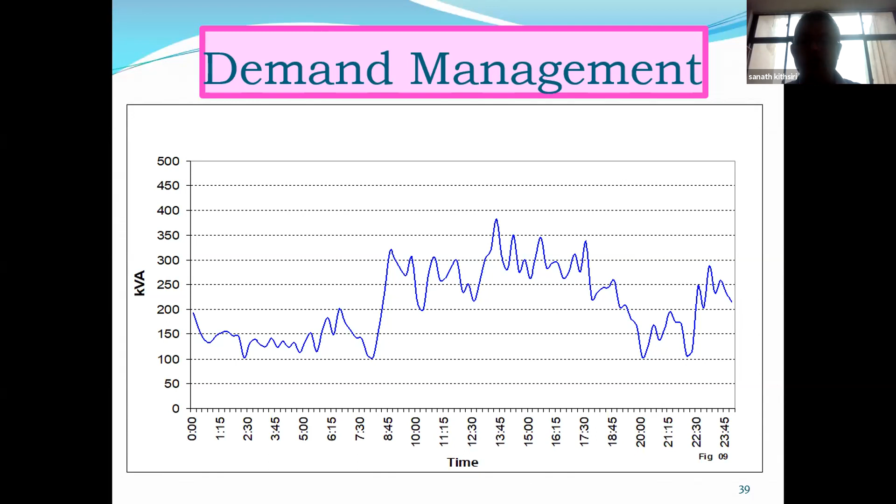If you have a power factor correction system, you can see, okay, my system is still good, no need for further improvement. Sometimes you can see there is room for further improvement, then accordingly you can act. To reduce the kVA, people use capacitor banks, but though you have a capacitor bank, servicing of the capacitor bank is also very important.

The other one is managing your major loads during peak time, because once you get the profile, you can identify, okay, this is my peak time, so you have to be careful to avoid the major loads during peak time if possible. Sometimes it is difficult to shift the load, but in some instances you can find there is room to shift the major loads from peak time, thereby you can reduce the energy cost.

And the other thing is the use of rewound motors, because we have seen in the industry most of the time people are using rewound motors, and those motors consume more energy, right.

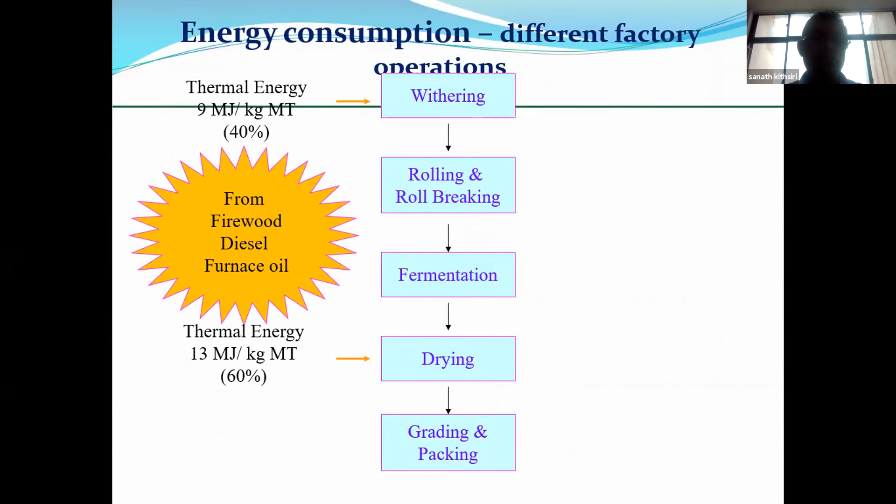So this table shows you the black tea manufacturing process as well as the energy consumption. If we look at the electricity, the specific energy consumption is in the range of 0.5 to 0.9. Thermal energy is mainly used in the withering and drying processes. When comparing these two processes, the drying process actually consumes more energy, in the range of 60%, and withering consumes 40% of the thermal energy.

Out of withering, rolling, fermentation, drying, and packaging, electricity is consumed most in the withering process. That's why you have to maintain your withering system carefully to reduce the energy consumption. When it comes to firewood, as I mentioned earlier, in most places nowadays people are moving to biomass from furnace oil.

As I mentioned earlier, in firewood usage, in most places there is not enough space for storing firewood. Because of that, in most places we used to use raw firewood. If you consider raw firewood and its moisture content, some part of the energy is used to evaporate the water. Therefore, definitely the useful energy portion will reduce.

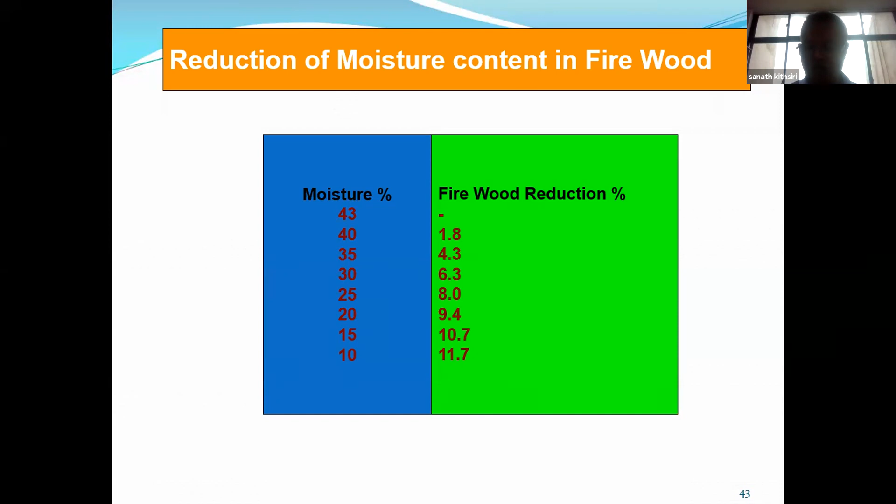You can see the corresponding firewood saving if we reduce the moisture content; those figures we derived on a trial and error basis. You can see, if we reduce the moisture content to 10%, definitely you can reduce your firewood consumption in the range of 11%.

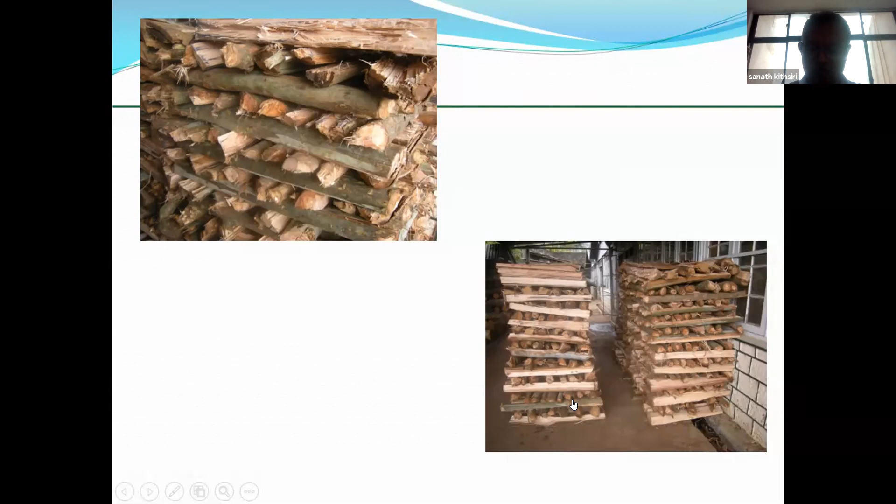You don't need to spend more money, but please consider this matter, because we have conducted energy audits in the industry in most places, and in most places people are not maintaining or not having a good wood management system, unfortunately. You can see by stacking the firewood like this, the moisture content will reduce to 25% within 5 weeks, right?

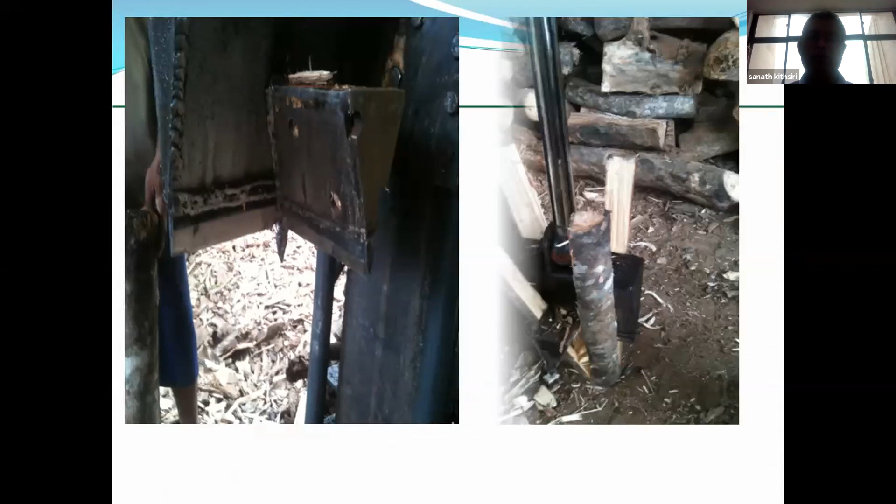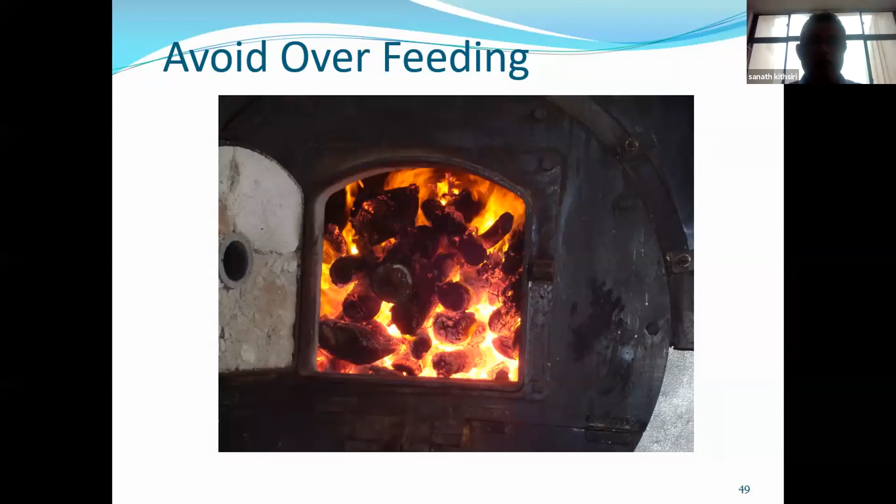Excess air is required to have complete combustion, but if you give more and more air, that is also a loss. So you have to maintain an appropriate level, and adjust the burners according to the fuel feeding rate. In most cases we advise you not to feed different sizes of firewood, because some people use sawdust together with wood blocks.

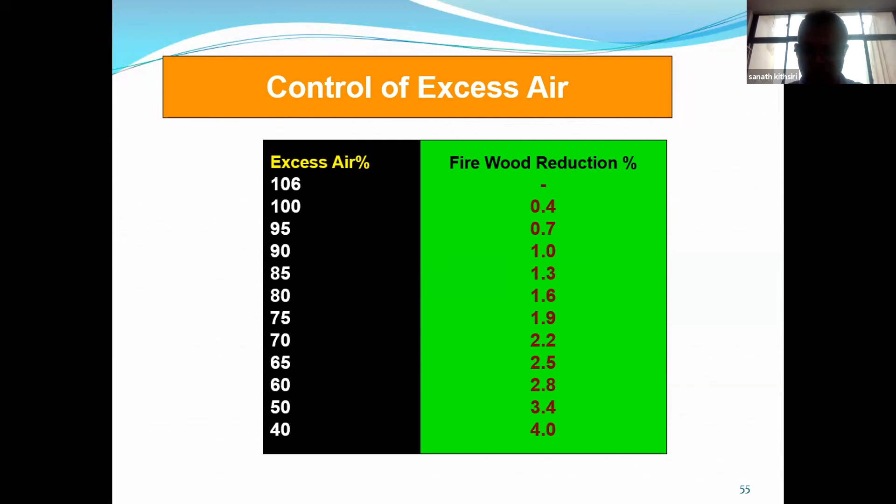In case of sawdust it doesn't need more air to combust, but wood blocks need more air. If we feed sawdust and wood blocks together, it is difficult to maintain the required air flow rate. If using sawdust, you have to adjust the burner air damper to that level, then once you switch to wood block, change to another position. So don't mix and put, right? That is an important area.

So in summary, firewood combustion solutions: use clean, smaller size, dried firewood, and a regular feeding rate is very important. Optimizing combustion air is also very important, because if you maintain those things in a proper manner, definitely you can reduce the firewood consumption, right?

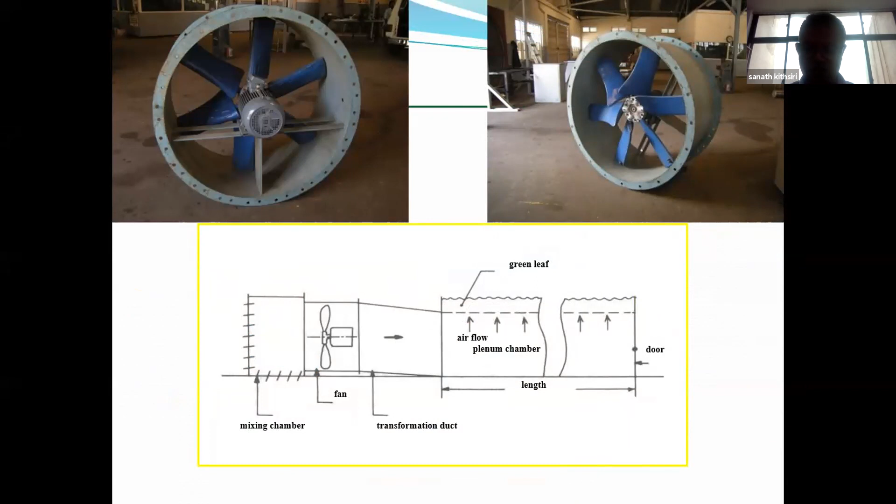In the withering process, we use air to remove the moisture from the green leaf, and we use an axial fan. You can see a schematic diagram of the withering process. We have a withering chamber and withering trough. We load green leaf on the withering trough. This is a schematic diagram of the withering trough.

Especially, I want to mention some fans where we can change the pitch angle, and thereby tune up the fans to get the required flow rate. For that, we have installed a withering fan test rig at TRI. You can use the service of that facility to adjust the fan according to your flow requirement, right?

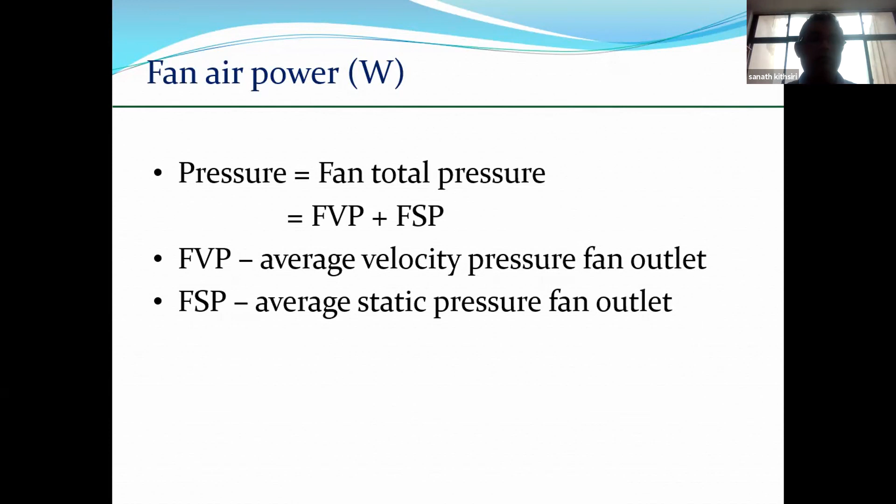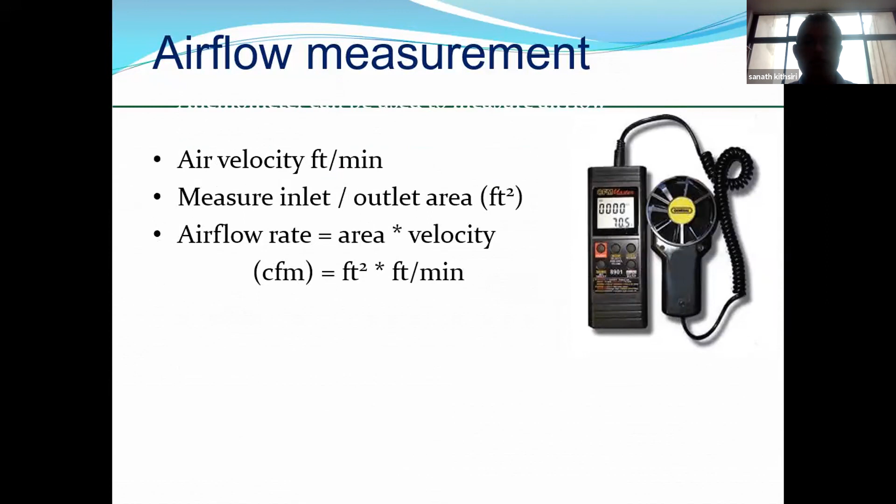This is a formula for how we can calculate the airflow requirement and power of the fan. You don't need to worry about this, because we use this formula later. The airflow we can measure using these kinds of anemometers, airflow meters, right?

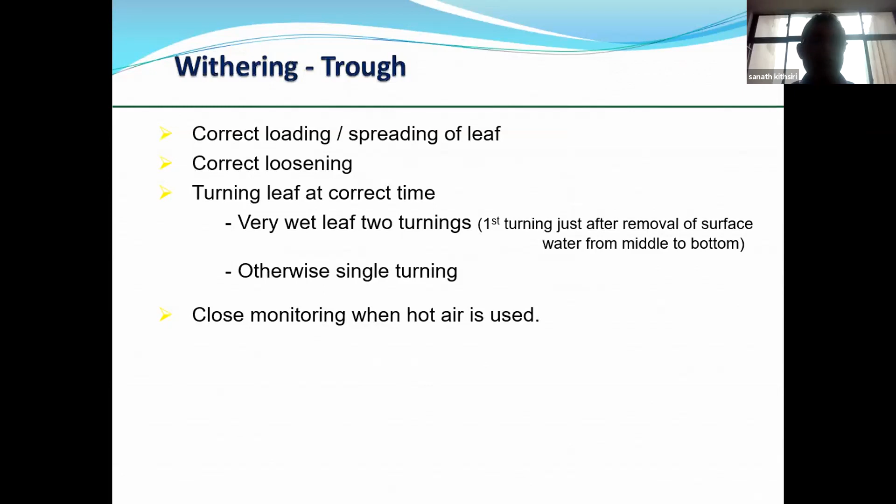When it comes to withering, some measures: correct loading, spreading of leaf is important, correct loosening and turning leaf at the correct time, right? If it is wet leaf, two turnings are required, otherwise single turning. In the dry season, single turning is there, and close monitoring is required, and pre-calibrated hygrometers are very important, because to get the proper wither, we have to maintain the wet bulb and dry bulb temperature.

The position of the dampers, the maintaining of dampers, functioning of the dampers is also very important. Those are the key areas we have to look at. And in some cases, some people are still using hot air duct systems to give some thermal energy, hot air, to the withering area.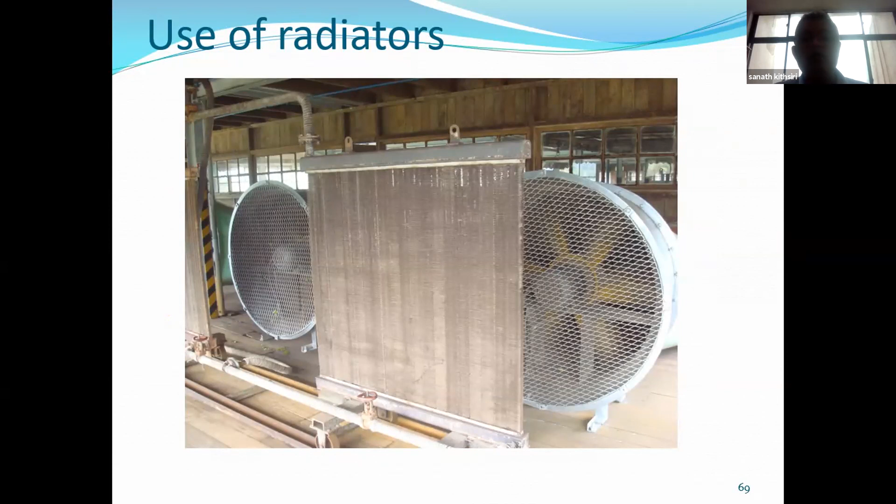Nowadays, if you have a hot water boiler or steam boiler, the radiator system you can easily employ, right? But still, if you have a duct system like this, especially if your factory is located up country, because during night time, most of the time the temperature will go down. Therefore, to reduce the surplus energy loss, it is advised to insulate the duct properly. Right, that is also another important area you have to think about.

Right. Those are some other parameters, right? You have to think. I'm not going to discuss them.

And sometimes we have seen blowholes during the withering process, because during withering a blowhole may happen, right? Because of that, there is some energy wastage. So you have to avoid this kind of operation.

Actually, if you are employing a VFD, right, easily you can avoid blowholes, because in the normal withering process, the motor runs at a constant speed. We reduce the airflow using dampers, but using a damper to control the airflow is not an efficient manner. If the dampers are not properly working, you can't reduce the airflow as you require. Thereby, at the end, this might happen, right?

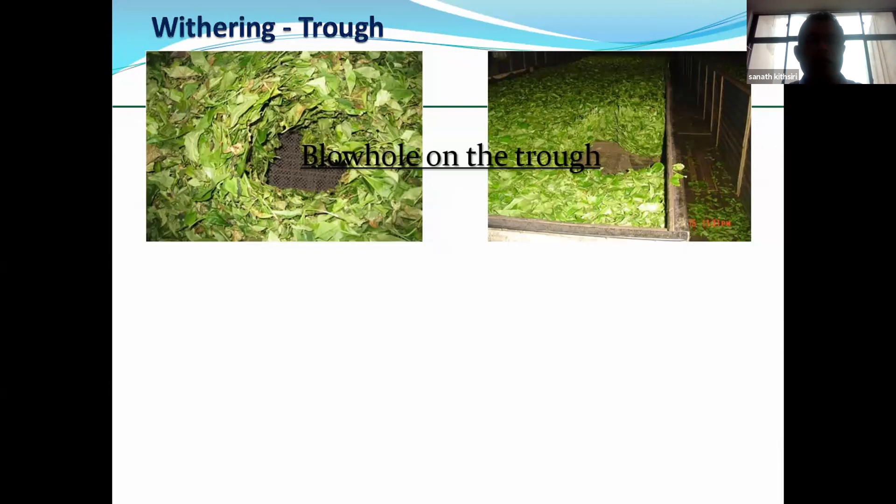Blowholes will happen, right? So maintenance of the withering trough is very important. Leakages should be avoided, right?

Actually, we use that nature of the operation to reduce the energy consumption by employing VFDs. In a VFD, the air flow rate will reduce by controlling the frequency, right? Not by changing the dampers, right? Smoothly, you can change the air flow rate as you require, right?

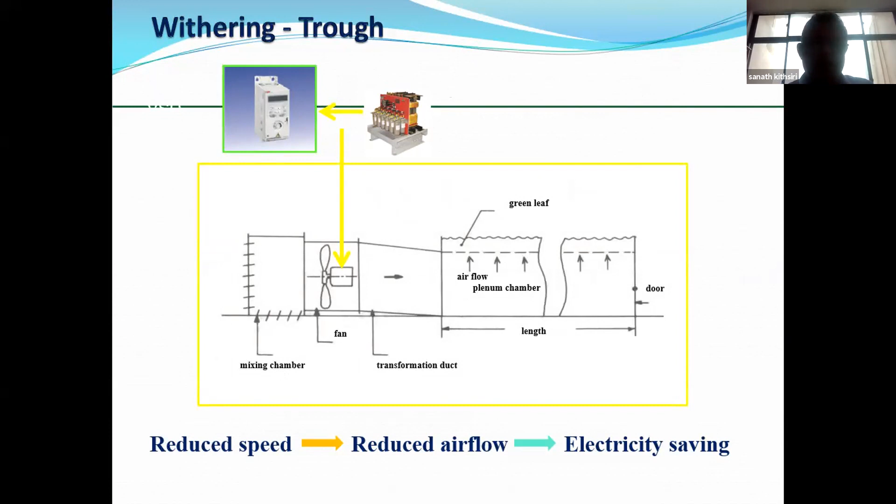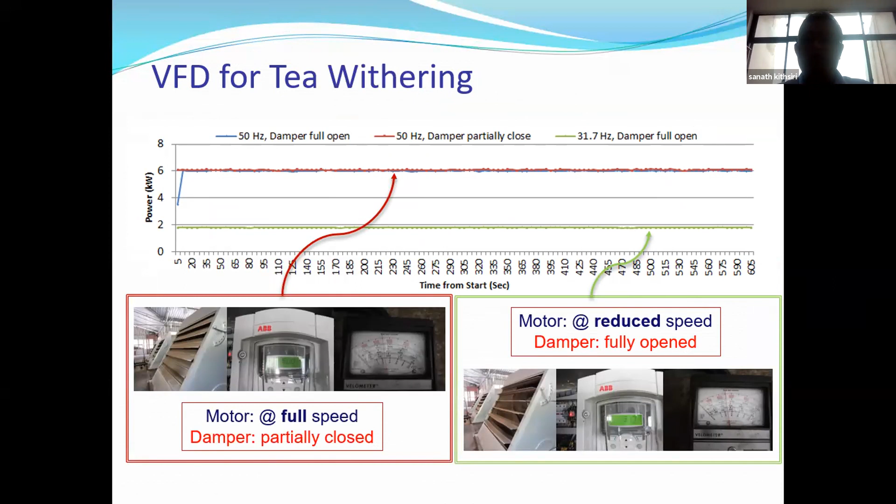I will show you some withering, because we have done some trial tests. This is how the withering process, the result of employing VFDs, right? This is a real example of what we did earlier.

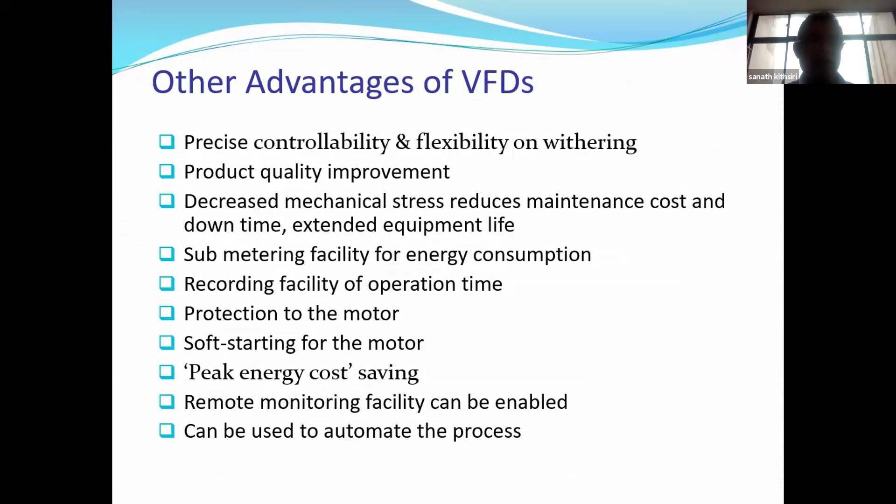So here I have listed other advantages, not only the energy consumption. Employing a VFD, there are a lot of advantages we can have, right? But unfortunately, people do not rely on this technology. Only a limited number of industries have gone for VFD application, right?

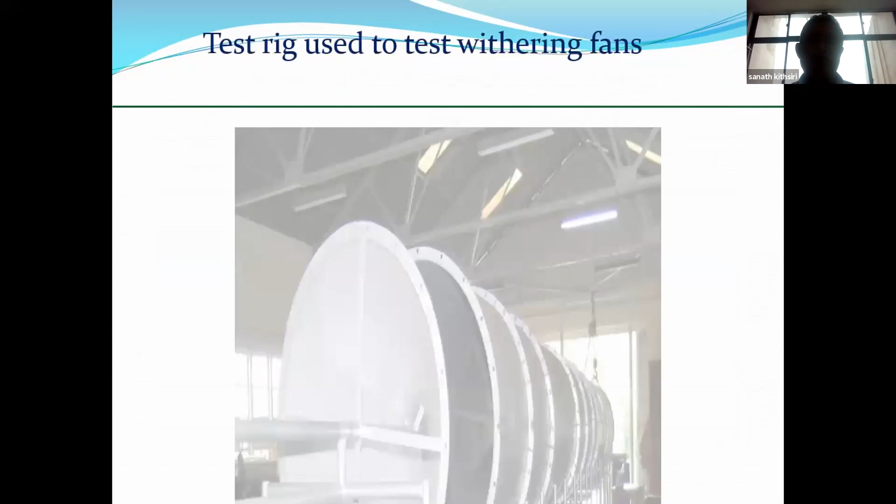This is a picture of the test rig, withering fan test rig at TRI, right? Then drying process. That is also another important area we have to look in, right? In drying, we use hot air to remove the moisture, right?

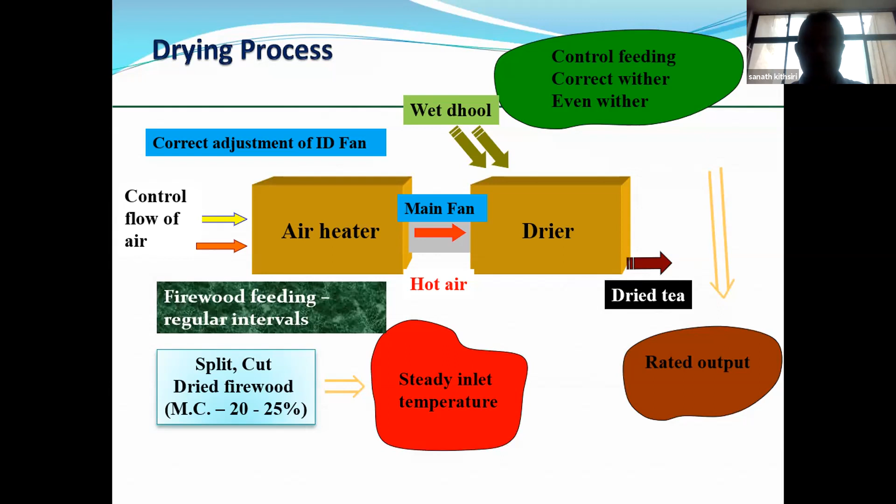When it comes to the energy conservation opportunities in dryers: maintaining uniform thickness of dhool, reducing air leakages, because sometimes we may find air leakages in the dryers, and maintaining correct temperatures is also very important, because if the temperature is not maintained correctly, sometimes you may have under fire and high fire conditions. Thereby the quality will deteriorate, right? And maintaining optimum air flow rate is also very important. And maintaining component efficiency, which I discussed previously. The cleaning and maintenance of the drying accessories of the dryer is also very important, right?

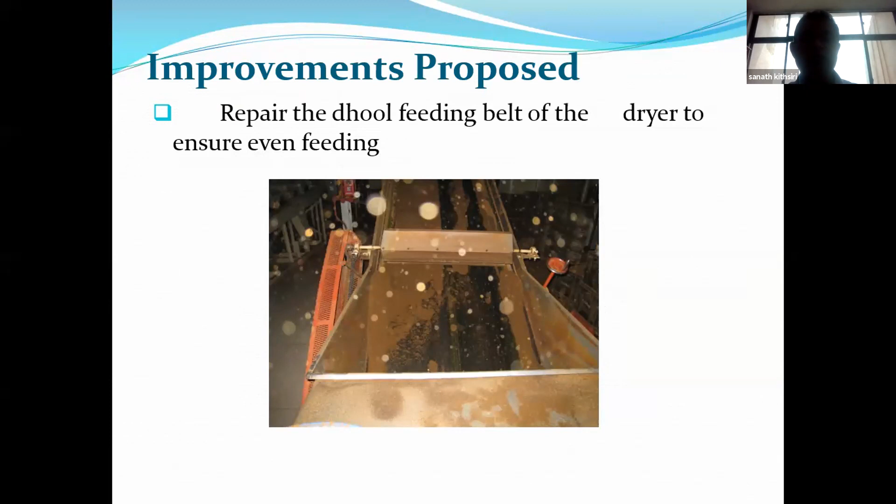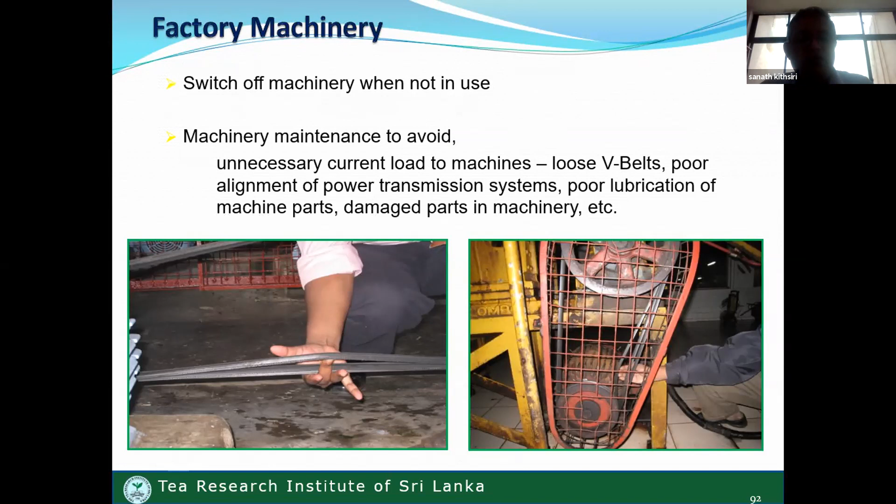This is a picture of an example of the uneven dhool feeding, right? You can see, because in most of the places we can see a situation like this. So maintenance is also very important, because belt tightening is very important. You can see, if you have a system like this, the power transmission efficiency will be decreased. You can see how this kind of thing will affect the power transmission efficiency,

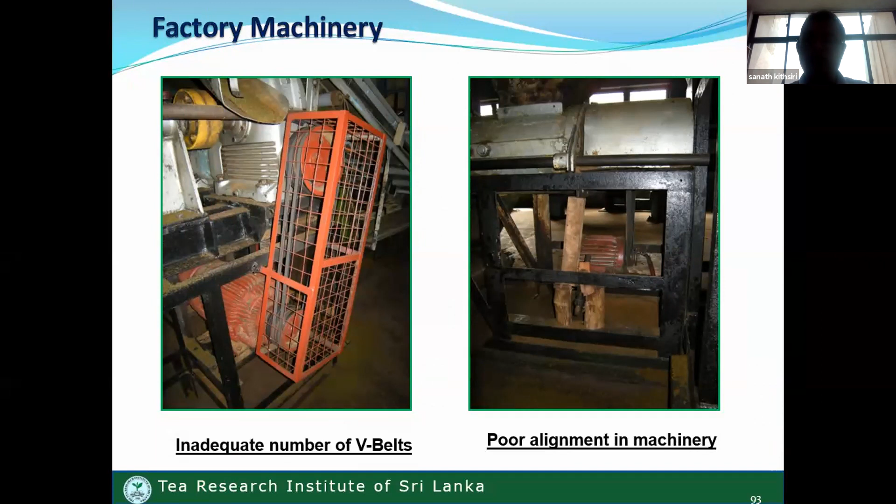Finally, when it comes to the renewable energy sources, basically sun energy is one of the key energy sources we can use as renewable energy. The sun gives two forms of energy: heat energy and light energy. Heat energy we can use for thermal energy applications. We can use it to generate steam. We can use it to heat up air and heat up water, right? And light energy we can use to generate electricity.

Actually, we have designed Surya Bala Sangramaya to support this, and this program is nowadays operating very well. Under this Surya Bala Sangramaya, you can install the solar PV system in your factory premises, on your rooftop. Ground mounted systems are not allowed. You are only allowed to install on the rooftop. There are three schemes: net metering, net accounting, and net plus. In the net metering system, there is no payment. Energy to energy will cancel. If there is excess energy, you can carry forward.

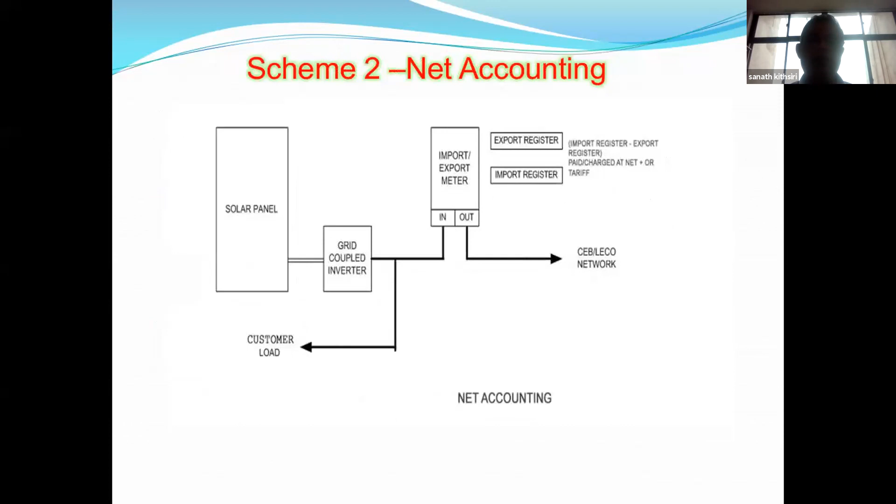As I mentioned earlier, the sun gives two forms of energy, light and heat. If you can employ solar thermal technology to meet your hot water requirement, easily you can reduce the electricity demand, right? Because we have seen in the plantation sector, in most of the bungalows, manager bungalows and other areas, people are using a lot of water geysers and online water heaters. Rather than using geysers and online water heaters, if you can use this kind of solar water heater, definitely you can reduce the energy consumption.

This is a very well established technology nowadays in Sri Lanka. When we talk about this technology, there are two kinds: flat plate type and evacuated tube type. In flat plate type, the major parts are constructed in copper, but evacuated tube types may have systems made out of food compatible stainless steel. So you can use the water from evacuated tube solar water heaters for food applications.

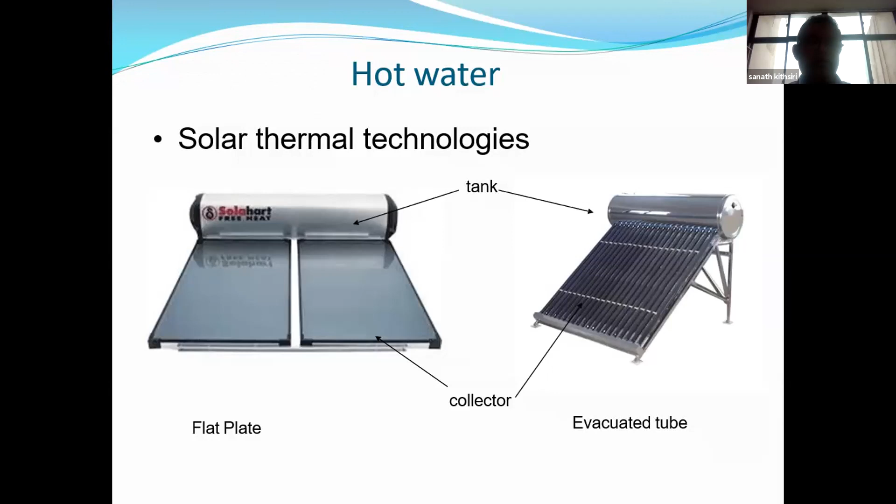But the important thing is that solar panel orientation and installation is very important, because the solar panel should be installed at the recommended tilt angle.

Eight degrees tilt, direction facing south. I convey this message to the client, because they come to your place and install what they want. But if we know the correct orientation and direction, we can ask for it. So be careful, the correct tilt is 8 degrees and direction south. If you install the system like this, definitely you can get more.

This is a good solution, because especially nowadays most government factories employ solar water heaters together with existing boilers. Earlier they used electric boilers to make tea. Now they install rooftop systems, and this normally generates hot water in the range of 80 to 90 degrees. So you only need to elevate it by about 10 degrees using grid electricity. Then you can drastically reduce energy consumption. But if you have a higher hot water requirement, you can consider this technology as a good solution.